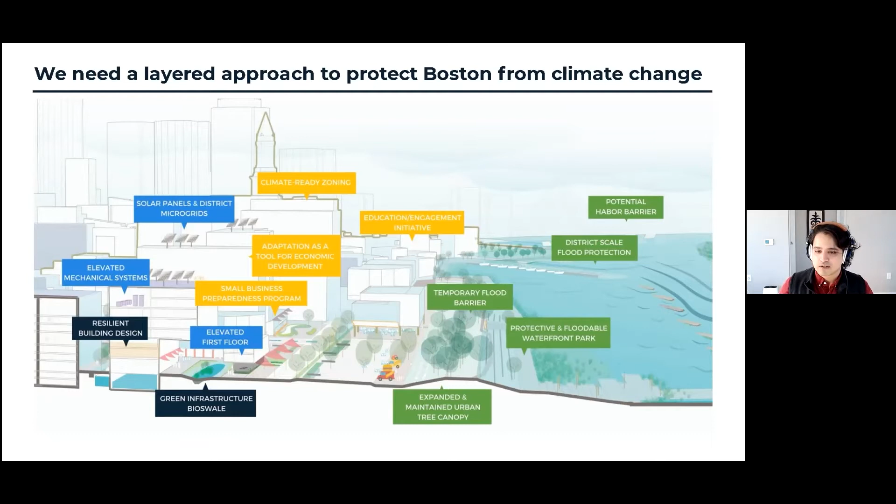I have a habit of starting my presentations with my conclusions, just one, so you don't get bored, and two, so you know where we're heading.

None of this is new to the people on this Zoom, but it's worth emphasizing today that even under current severe conditions, there are several areas of Boston that can serve as entry points for significantly damaging floods. The risk is only increasing each year, but it's very present today in many of our neighborhoods.

Given this urgency, we at the city are committed to exploring all feasible options to reduce climate risk, protect residents, and improve life outcomes for our residents today. But we know it's risky today, and we really need to move urgently. There's a time pressure here.

Second, given the complex ownership and activities along the waterfront in Boston, it's clear that there's a role that private owners must play in being a part of the solution. As Climate Ready Boston shows, successfully implementing resilience investments in areas like the Wharf District and downtown require entirely new levels of public-private coordination, as well as new and more robust coordination among private property owners themselves. We believe it's possible to achieve a world-class resilient waterfront that is safe from severe floods and accessible to the public, but it's complicated and nothing is guaranteed without serious new levels of coordination and collaboration in Boston and across the region.

Third, it's urgent. In areas of Boston that are complicated and require extensive public-private coordination, we do have a real but very narrow window to achieve a unified network of protection in the city. We all know in Boston that public-private coordination can take time, and infrastructure projects, especially big ones, do too. So climate change really isn't waiting, and we expect even in the next decade to have significant increases in risk and exposure to severe flooding.

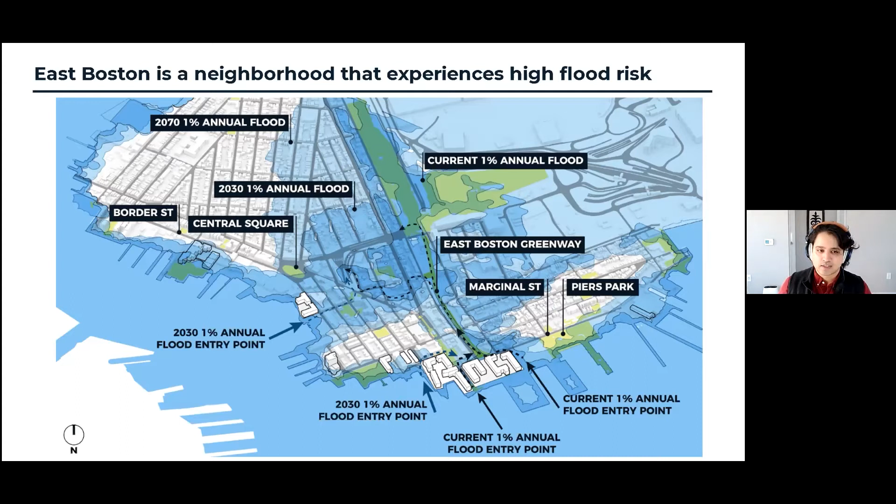Overall, in many other areas of this neighborhood, you see a wide range of fringe flooding, or flooding that comes over the edge but is not necessarily a flood entry point deep into the interior.

In our 2017 study, we identified critical immediate projects, some of which we have completed. First, as many of you know, we purchased and regularly test deploying temporary flood barriers to close one of the Greenway flood entry points. This barrier under Sumner Street actually blocks the current 1% annual chance flood with 1 foot of freeboard. It was great in terms of benefit cost — you're protecting thousands of residents and many businesses for something that's deployable and something we can do today.

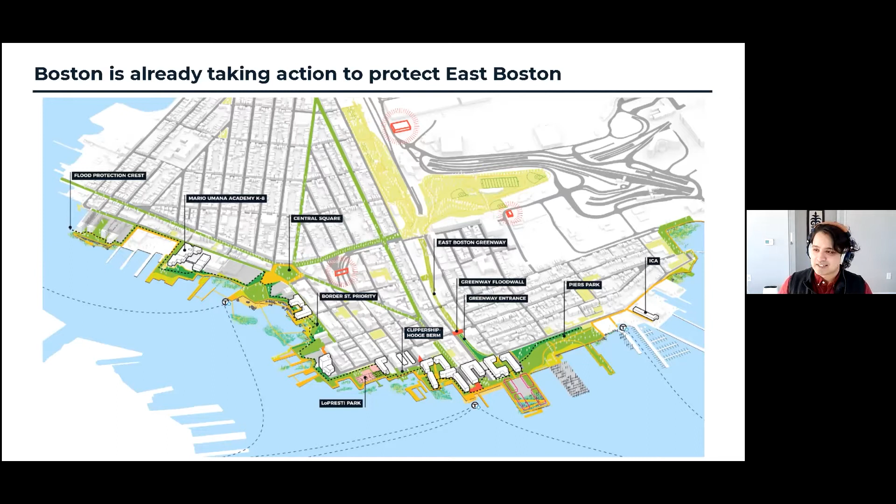Additionally, this fall the BPDA was awarded a $300,000 grant from CZM, the Coastal Zone Management, which will help support flood protection and mitigation measures around Carlton Wharf and Lewis Mall in East Boston, which we identified in this report. And of course, we've seen significant progress at Piers Park and Clipper Ship, figuring out essentially how do we start implementing and knitting together these plans. So East Boston is in progress, and as I mentioned, we're doing a follow-up study and some additional more detailed work.

Moving on to Charlestown, which was done at the same time as East Boston. I can draw your attention here to the area near Ryan Playground, the Schrafts Building, and Sullivan Square. This is the main flood entry point that we've defined so far for Charlestown, and it's a current flood entry point — it's in the 1% annual chance today.

Since this report, we're currently exploring the process of elevating streets in this area, which is a straightforward benefit-cost thing we can do now to protect and block off this flood entry point. We're also exploring how this work connects to other improvements the neighborhood wants to make, or other developments that are currently ongoing or may happen in this area.

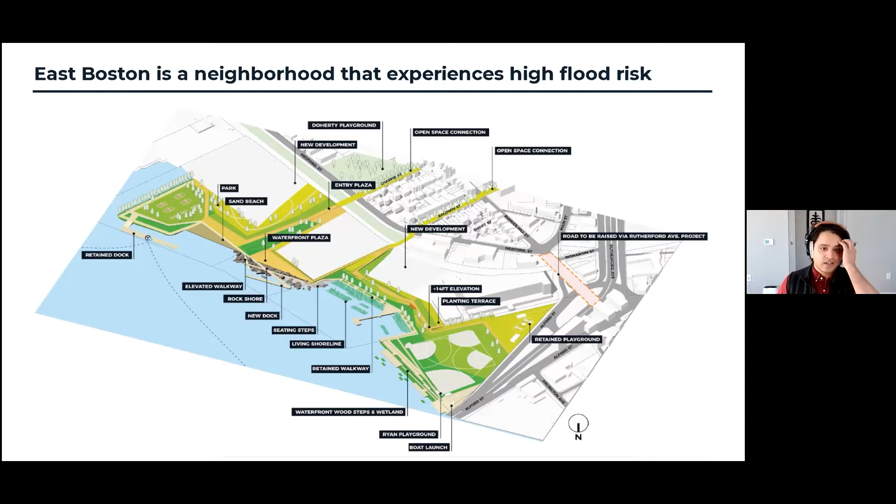This is stuff you've seen before, but it's important to remember that there's things happening in every neighborhood of Boston. Transitioning quickly to our South Boston work from 2018. In South Boston, unlike our prior two studies, we actually didn't have these kind of clear flood entry points that were relatively straightforward to close off.

So in the South Boston report, in addition to focusing on every aspect of this waterfront, we had particular attention on the Fort Point Channel, as it's really a critical site for flood entry into South Boston, and in future years would also lead to flooding in the South End, Roxbury, and other areas. You can see the light blue showing the extent of future flooding that could result from not taking action in Fort Point Channel. So that's another reason why it's critical.

And so for the Fort Point Channel, if you look at the eastern side of that channel, which is at the top of your screen, that is also the site of a 100-acre master plan effort and is a critical flood entry.

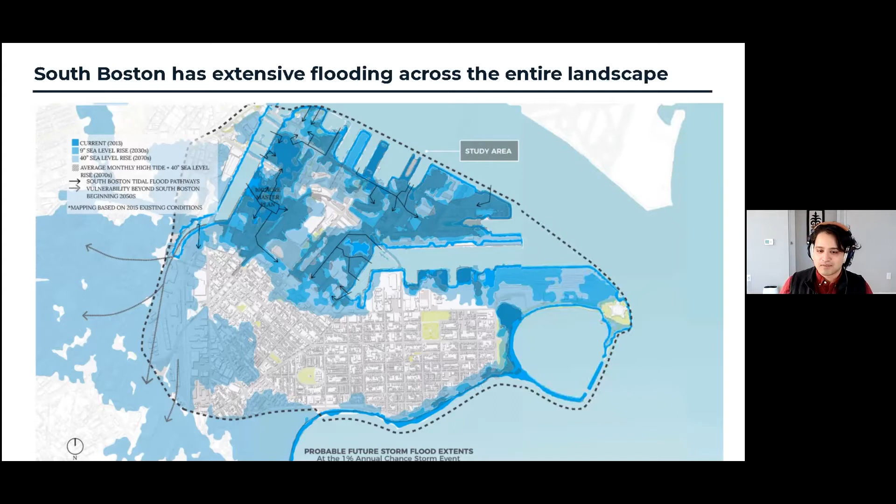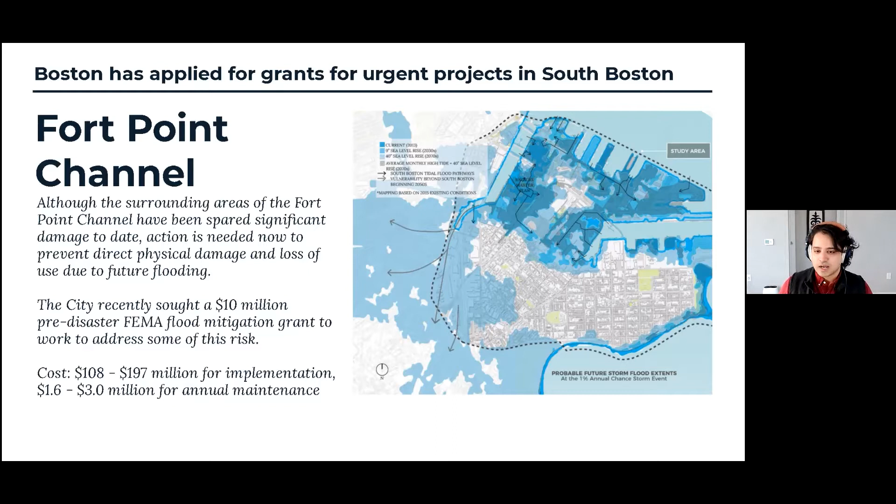Since this report, just to share, some of you might know that the city has recently applied for a $10 million pre-disaster FEMA flood mitigation grant to make progress toward addressing this particular flood entry point. Obviously the full cost and complexity of this is more detailed, but there's work we can do now to help move forward on this Fort Point Channel and make sure we're taking action in every neighborhood. This area has been spared significant damage to date, but it's a current risk, and we really do need to move quickly to protect this area and avoid loss of use due to flooding.

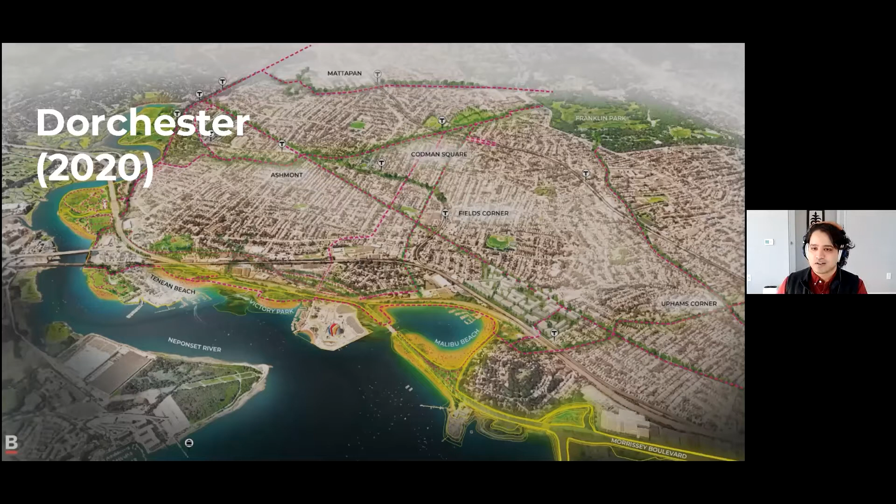Before digging into Dorchester, it's good to mention that last year, the year before publishing this report, we completed a vision plan for Moakley Park that defined a plan which, if implemented, could protect the neighborhood from future flooding and also retain and enhance key active recreational amenities and create equitable access to the waterfront.

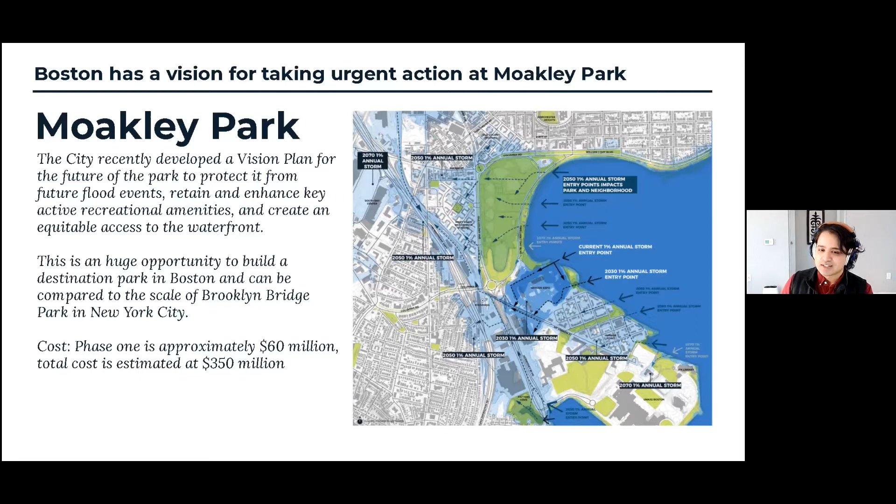This park, which could be compared to the scale of Brooklyn Bridge Park in New York City, gives us the opportunity to demonstrate the added value that climate resilience can bring to residents besides just protecting them from floods, which is very motivating to wonks like us, but maybe less exciting to others.

Just south of Moakley Park, the green blob on the right, you can see the Bayside Flood Pathway, one of seven major flood pathways in Dorchester that we'll need to address in a sequenced, phased manner. Our report recommends integrating flood protection along with the Bayside development project near Carson Beach, tying into the work around Moakley, and then raising the harbor walk around Harbor Point and tying into high ground at UMass.

The goal is a continuous line of protection. I'll go over quickly how we would get there in Dorchester. Similarly, at Morrissey Boulevard North, our report defines a couple options. One of them could be as simple as just raising Morrissey, and another option would be developing a berm along the edge of Morrissey, a berm being a pile of dirt that blocks water.

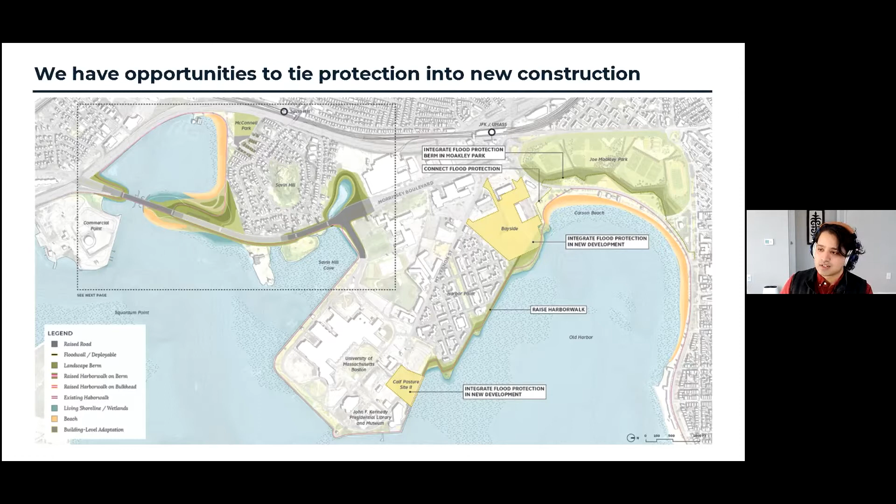Doing that along Morrissey, and then raising areas including McConnell Park, finalizes this section of protection for Dorchester. The main benefit is you're protecting access to the waterfront, protecting existing community assets, and coming up with solutions that are very adaptable and cost effective, which we can put together quickly.

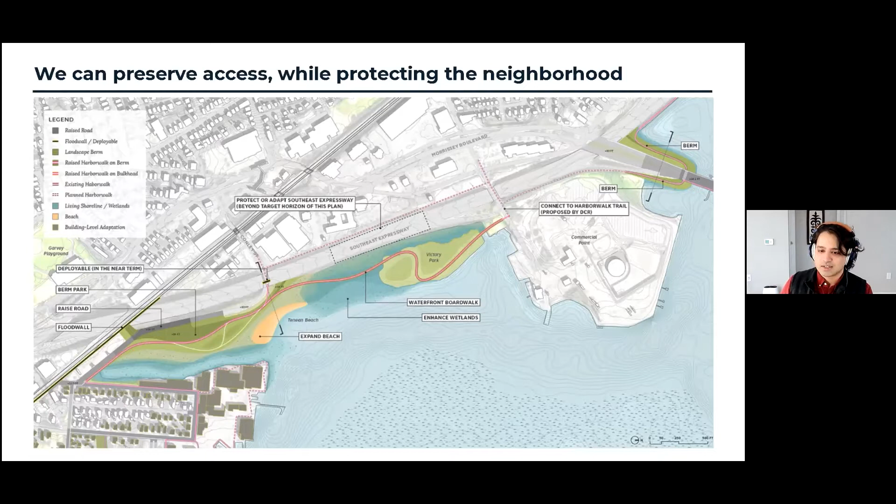I'm going to flip through these pretty quickly given we have 5 minutes. The main thing here is that it's possible to have a clear alignment in this section. Some near-term work we can do is looking at deployable flood barriers at the Conley Street underpass to address current risks, and in the long term, additional berms and road raising.

This is an interesting neighborhood, the Port Norfolk neighborhood of Dorchester. In our report, we propose raising the roads and park elements to protect the existing neighborhood.

And then, to the discussion of a layered approach, we're really thinking about additional building-level adaptations for individual homes that are impacted. So not only protecting with raised elements, but also looking at individual homes and doing a similar thing there in the long term.

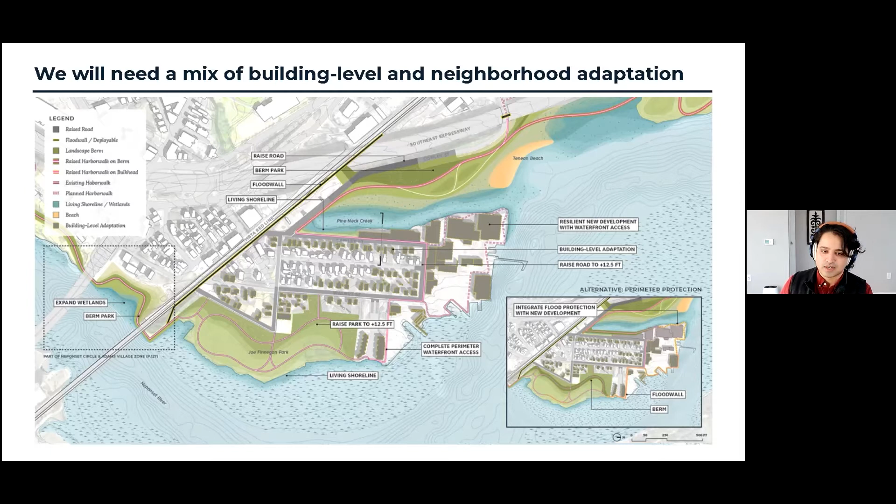Lastly, in our Dorchester report, we determined that maintaining the existing wetlands in this area can actually maintain flood protection while giving us other improvements and retaining existing ecosystem services. So we can use our existing wetlands to protect us and provide benefits there as well, while conserving intact wetlands.

Lastly, I'm going to go into the North End and Downtown report. The long story short here is that there's flooding, and without action, there's going to be a lot more. The dark blue in this map shows current flooding, which if you look at the Long Wharf area, is significant today.

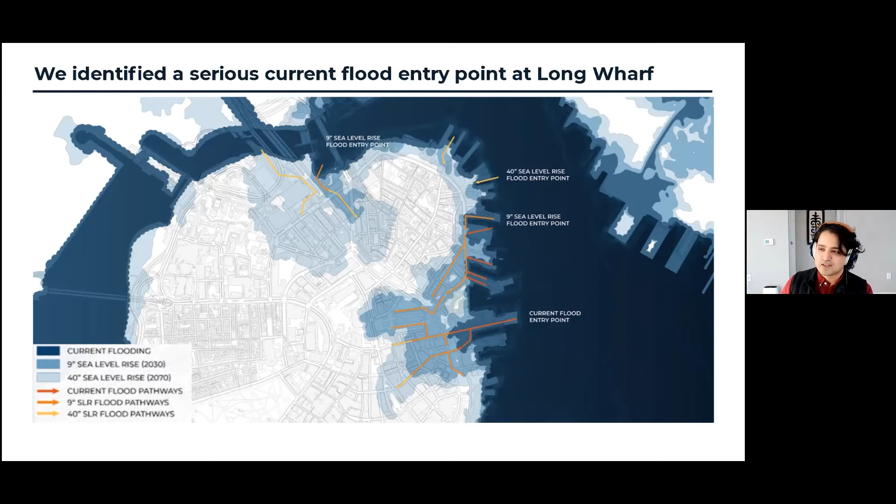The medium blue shows flooding associated with 9 inches of sea level rise expected in the next decade, and the light blue is 40 inches of sea level rise expected in the next 50 years. You can notice significant connections between the flood entry points, so there's no silver bullet here, no single solution. You do need to deal with the whole district.

Our work really looks at a district-wide solution and looks at 4 different options to implement this: spines, which are raised roadways or linear elements; open spaces; raising the harbor walk; and offshore elements like filled lands or ecological systems and breakwaters.

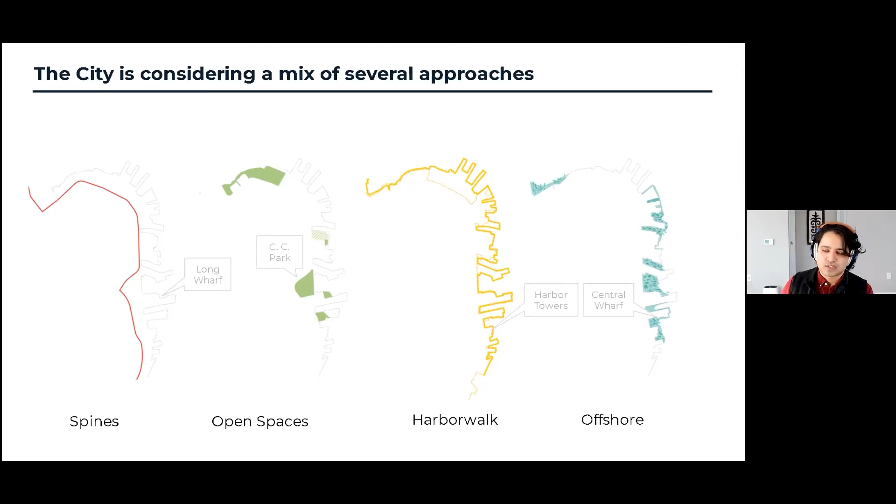Some mix of this is going to be necessary, and it's not going to be easy, but it's going to be doable. The city will help facilitate this negotiation process, working with everyone who owns land along the waterfront to see if we can get to the preferred option, which utilizes all of these strategies to make sure we can maintain access and have everyone protected behind a line of protection.

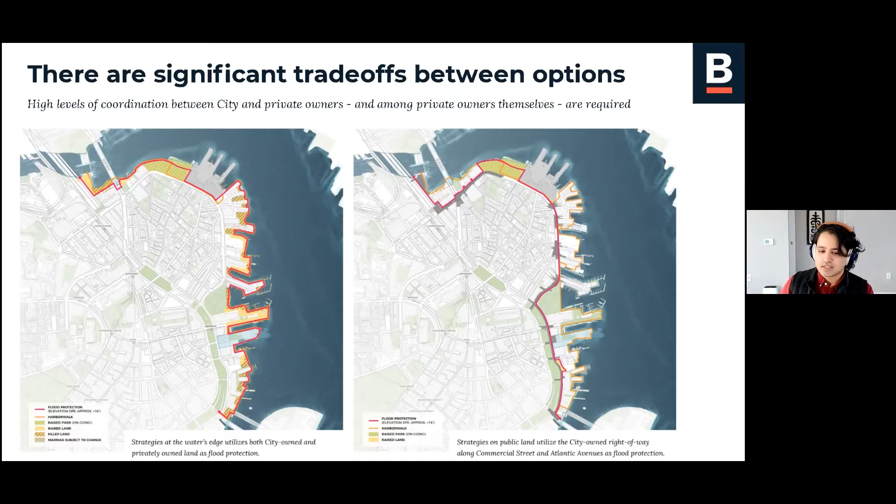The main challenge there is obviously cost, complexity of collaboration, and the length of the actual perimeter of protection required to cover every wharf, plus the complexity of building on existing bulkheads. The option on the right is the fallback, which is not preferred, but would use only city-owned lands, and this would allow us to more quickly establish a continuous line of protection.

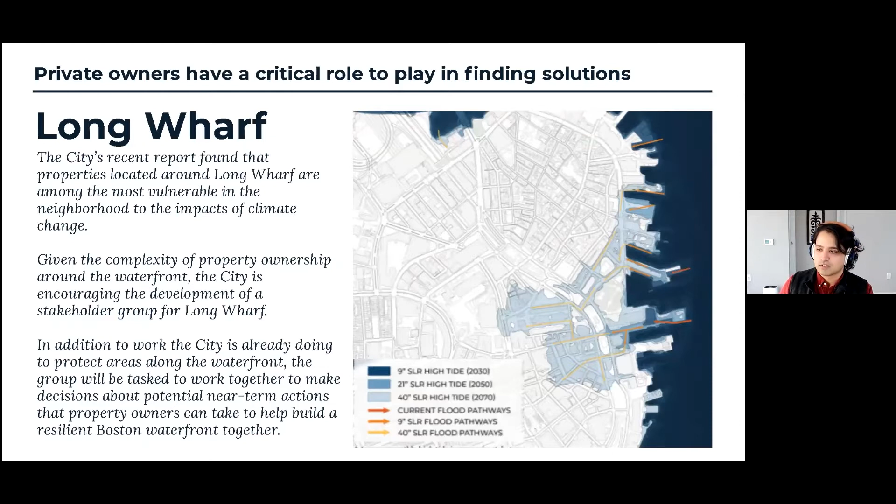If you're interested, you can look at Langone Park and Puopolo for one of the city's first implementations of a park with climate resilient design. And we've launched a stakeholder group for Long Wharf to look at private property owners and what they're doing.

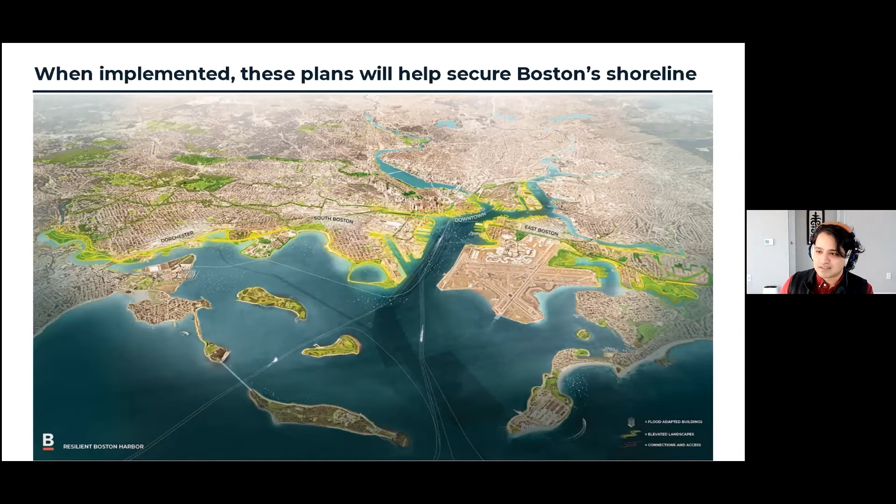While we won't be able to realize this vision tomorrow, the projects presented in these plans are feasible and cost effective, and they do protect residents. These projects will help deliver on Mayor Walsh's vision of a unified line of protection across the entire harbor that not only protects residents from climate change, which is the goal of many on this call, but also equitably improves their access to the waterfront and ensures these investments add value to residents and visitors in their everyday lives, on sunny and stormy days.

Quickly, what's next for Climate Ready Boston? We have a bunch of things coming up. One is a citywide heat resiliency strategy, so we're targeting environmental justice communities with a specific race lens on how Boston and people's experience of Boston has been so far. We're going to be looking at those communities, coming up with strategies, and proposing how to move forward in the near term on heat.

We're working with the BPDA on some East Boston resilient design options, thinking about how we move forward on things we identified in our prior plans from 2017. And I mentioned our phase 2 planning. Finally, something I'm really excited about is how do we bake flood resilience into our zoning. This is a global best practice, and Boston's at the front of this along with a few other cities. How do we really do this in a way that makes sense, is clear to all parties, and actually achieves the goal of a more resilient Boston?

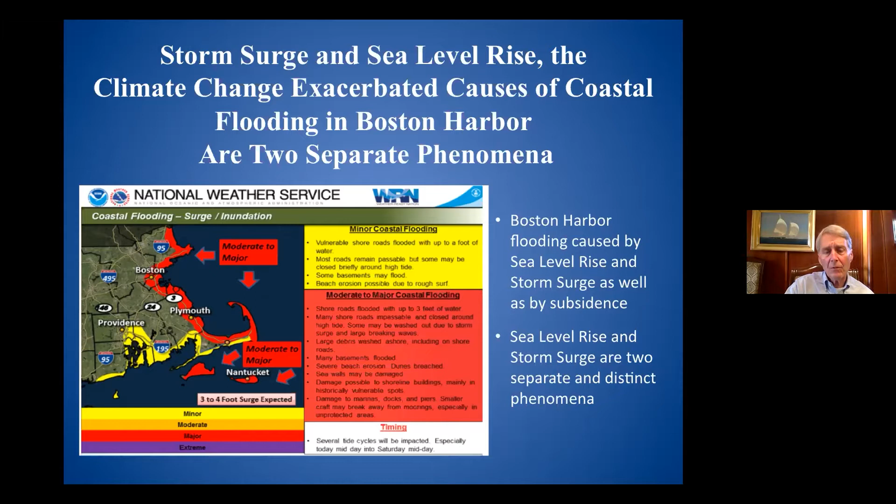In this case as well, we believe these are two separate phenomena that have to be addressed with two separate approaches. Sea level rise is gradual, at least in the short and midterm. In the longer term, there's a great deal of discrepancy in projections as to how fast and how high the sea level will rise. But there is a sense in all quarters that this is gradual, and in the near term, we're dealing with nuisance flooding and minimal damage caused by it.

Storm surge is much different. It is caused by extreme weather events such as tropical cyclones and nor'easters, and these storms are more frequent and getting stronger and more damaging due to climate change.

2020 was a record year, and I'm sure most of you have followed this: there were 30 named Atlantic storms, and 12 of those hit the United States. They hit mostly in the Gulf, so it didn't seem like a record season up here in the Northeast, but it was a tragically record season for those areas, particularly the Gulf Coast. We have to recognize that we've been building along the coast, and 40% of the population of the United States lives along the coast.

If you look at these Atlantic storms, 15 of the most destructive US storms in history have occurred since 2004 — in less than 20 years.

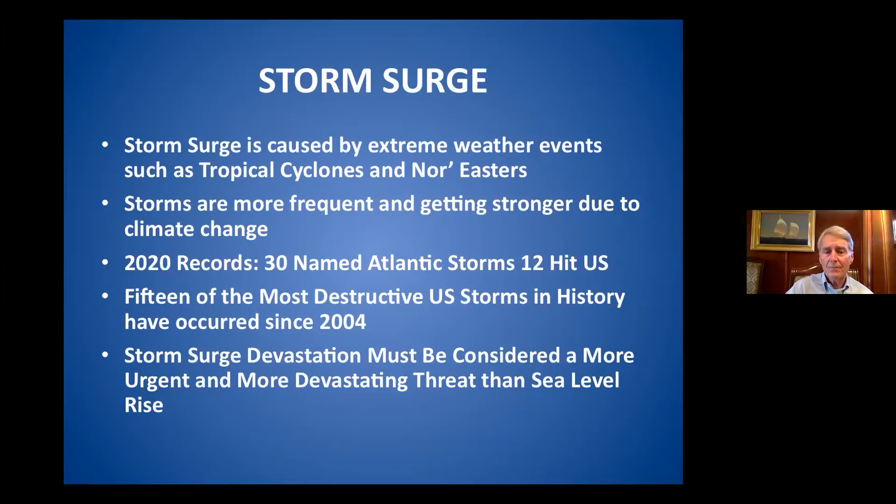So in 2018 — I mean, I'm a Bostonian, and I know that, by the way, there'll be a quiz here. One of our speakers is from Indiana, one is from Boston, one is from Queens, and one is from Texas. We'll have a quiz afterwards for you to determine which is which, but I think it'll be quite obvious, actually.

In 2013, I held the first interstate national conference on sea level rise, storm surge, and aging infrastructure at the Kennedy School. At that time, the general attitude from people from Boston was, well, that's for the rest of the country, Boston is different. As we all know, the rules of gravity or hydrodynamics don't apply to Boston—but they really do.

In 2016 with the king tides, and 2018 with the nor'easters, we received a wake-up call. The entire Boston Harbor region was flooded. Public safety and security in these communities was dramatically witnessed by rescues from Winthrop to Hull, in which people's lives were placed in danger—not only the people in flooded areas, but the first responders who bravely went out in the storm to save them. And our economy was impacted.

Boston is the economic engine for the whole Northeast, for all of New England. This whole metro area was so impacted that we not only lost buildings and structures and had that kind of damage to public infrastructure, but there was a great deal of business disruption that hurt the economy for some time to come, particularly in low income and poor areas. It even impacted the marine ecology of Boston Harbor. For those familiar with Belle Isle Marsh, you'll know how devastated that natural, very special spot was. And it really challenged social justice goals and values.

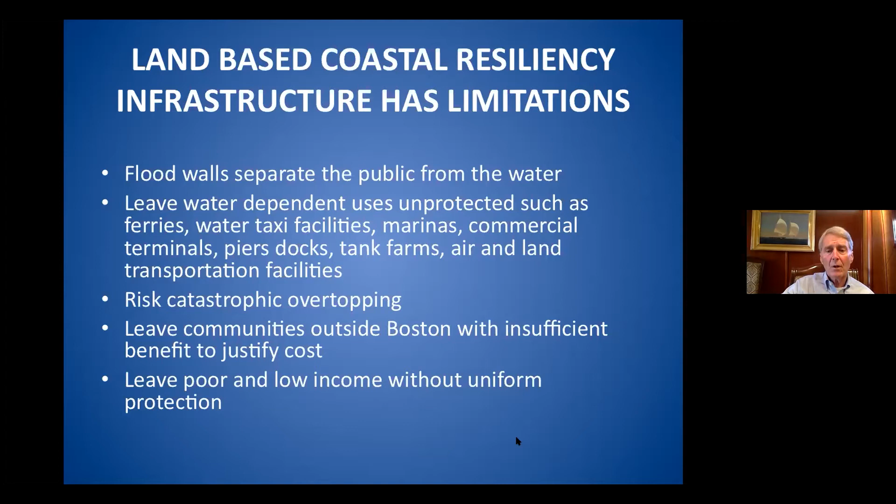You risk catastrophic overtopping. Water going over a regional seagate system goes into the harbor. Water that goes over a land-based system goes into the community. And they leave communities outside Boston with insufficient benefit to justify cost if they're done only in Boston. Again, they leave poor and low-income families particularly vulnerable.

The advantages of a layered defense system are the opposite of that. They don't leave communities outside Boston with insufficient benefit to justify costs. They provide uniform storm surge protection, and comprehensive protection for all public and private coastal infrastructure, ensuring regional public safety and economic protection.

Study of a layered defense option is good public policy. It's good for the economy, it's good for public safety. The option of a Boston Harbor regional coastal resiliency system merits study. It has not been studied. There was a UMass study that came out a couple of years ago, but it says right in the study that, one, it's a preliminary study, and two, it doesn't address layered defense or hybrid systems.

I'm quoting from the study: 'One option not explored is a hybrid solution where a barrier is only used to manage low frequency intense events, with a limited number of closures during a decade, and shore-based alternatives manage all events while providing protection to events managed by a barrier system.' That is what we're proposing.

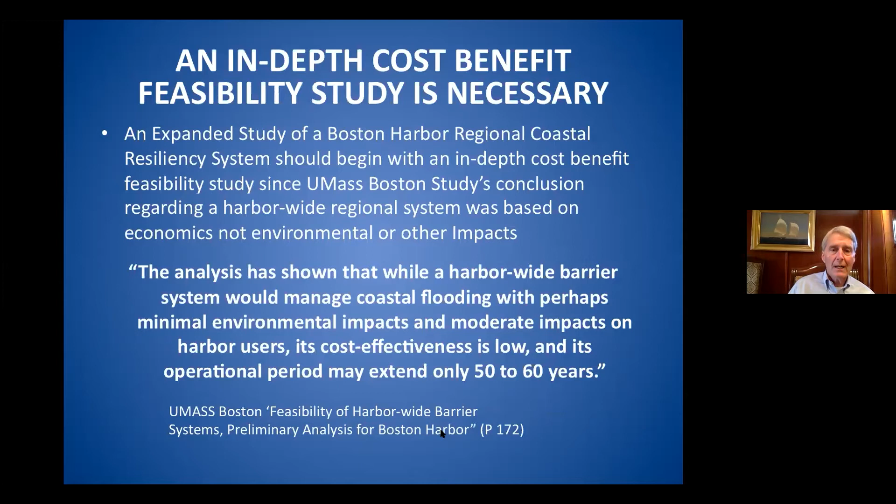So in doing this study, we have to look at a number of cost factors. That means looking at all kinds of different designs, design life options, alternative construction methods, construction timeframe, the possible multiple beneficial uses, and particularly the discount rates applied and finance options.

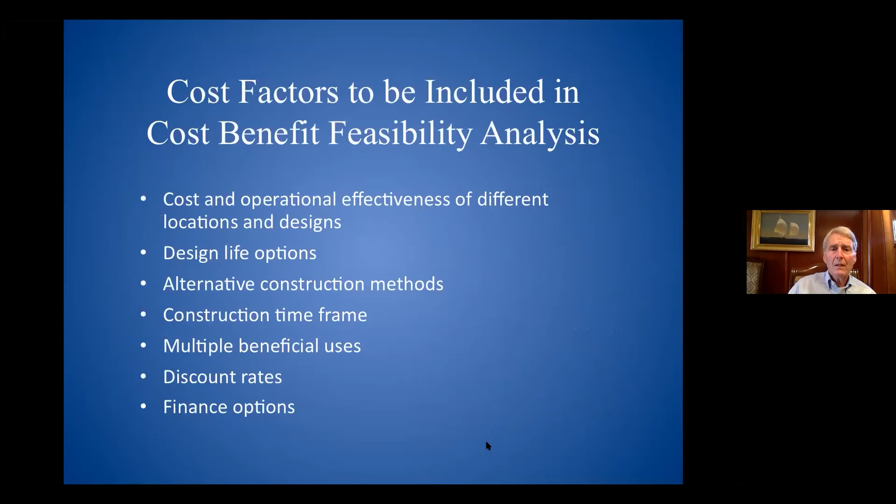The economic benefits of the Boston Harbor Regional Layered Defense System are multiple. They protect public infrastructure—you don't have to raise roads and train tracks and all that. Protection of residential and commercial structures, reduction in flood-related building code costs, preservation of private asset value and public tax base, improved municipal corporate bond ratings, increased coastal development due to reduced flood-related zoning restrictions, reduction in business disruption costs, reduction in insurance costs—which you'll hear more about—with the elimination of mandatory FEMA and other federal insurance requirements, and reduction in the cost of perimeter land-based coastal resiliency infrastructure.

You do not have to protect every single mile of the 175 miles of coastline with a large system that protects against sea level rise and storm surge. You also avoid what is a significant problem with land-based structures of any height: you can reduce stormwater pumping and retention facility costs, because those walls around the perimeter are going to be bathtubs collecting stormwater in heavy rain situations.

There's an idea in Boston that seagate systems are not proven technology. Well, they are proven technology—throughout the US and Europe, as you'll hear.

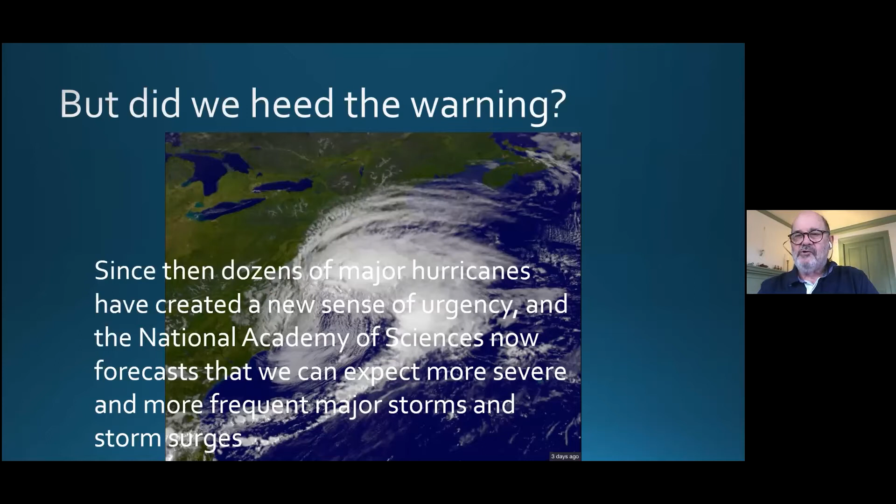We had $75 billion in physical damage, much longer term damage to infrastructure, disruption of business, and so forth, and more than 100 people killed in the metropolitan area around New York by Sandy.

Unfortunately, the immediate response was similar to the immediate response in Boston, which was every man for himself. Like Boston Harbor, we have dozens of communities fronting on New York Harbor and the Lower Bay, and each community kind of went out on its own and started developing its own local protection strategy - essentially perimeter barriers, seawalls, dikes and levees and so forth.

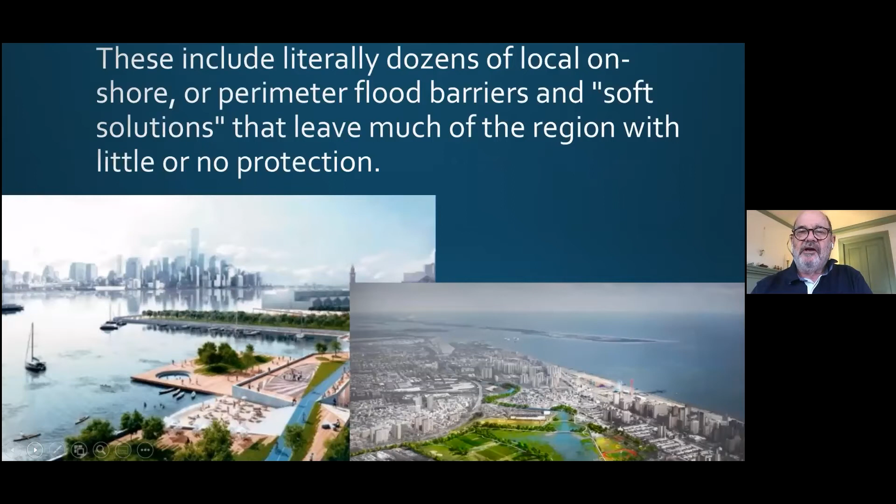The City of New York proposed building literally dozens of onshore barriers or soft solutions, created wetlands and so forth, that left much of the region with little or no protection.

Mayor Bloomberg directed his staff immediately after Sandy to come up with solutions that could be implemented by the city on its own, without having to collaborate with the state of New York or the state of New Jersey. He was also very skeptical of the offshore Seagate concept, and told me right after Sandy, 'Look, Bob, King Canute couldn't keep out the tides, and neither can I.' I reminded him that King Canute didn't fly to Bermuda every weekend to go play golf, and there's some new technology since then. He glowered at me, but that was the direction he gave his staff - stuff the city could do on its own, without having to collaborate with the Army Corps or the states of New York or New Jersey.

Most of these projects, none of them have been built. Nothing's operational after 8 years, and none of them are fully funded at this point.

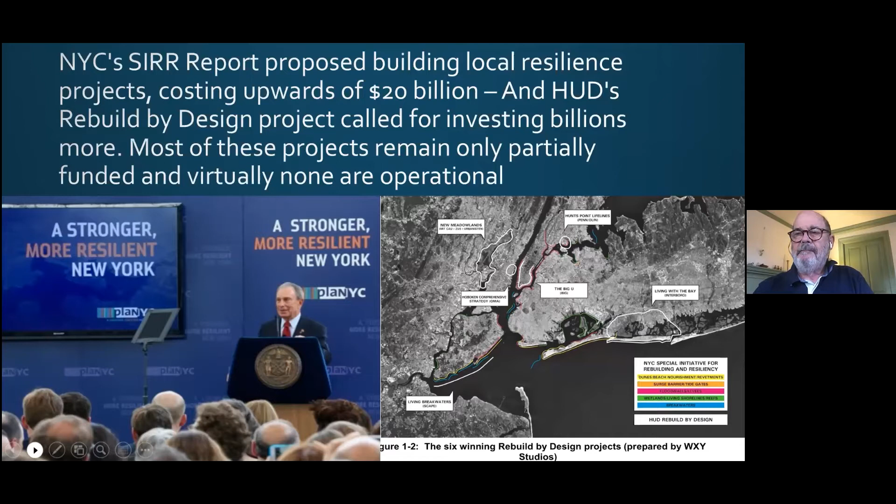Here's a detailed map - if anybody's interested, I can show you the dozens of different recommended actions to protect just the 5 boroughs of New York City. You see that the gray areas to the west and east are the terra incognita, like the pre-Columbian maps of the world - we know there's intelligent life in New Jersey and on Long Island, but we don't know much about it, and we're certainly not going to do much about it.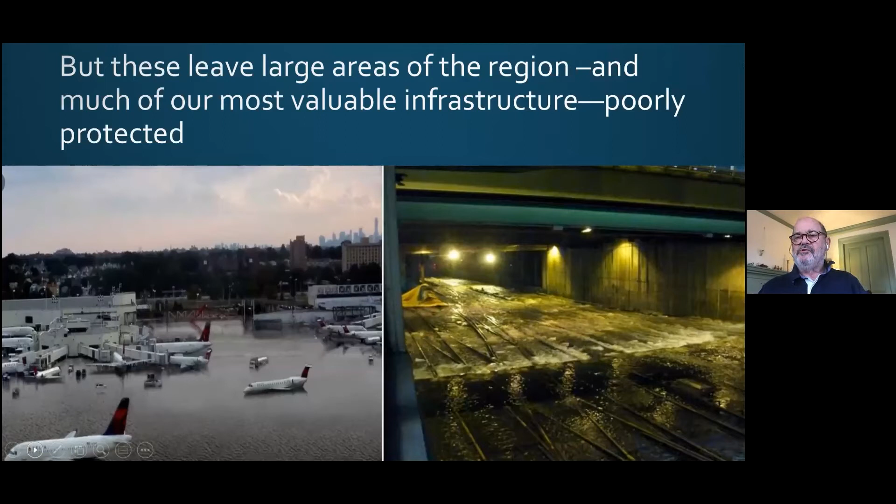We've been looking at the communities affected by this, and an inordinate share of the impacts have been on low-income communities. Robert Moses and others loaded up places like the Rockaways in South Queens that flood frequently with public housing, and nursing homes and that sort of thing are highly concentrated in these areas. So it's an inordinate impact on the most vulnerable populations.

We know now that projects that were supposed to be fast, relatively low cost and effective are turning out to take a lot of time to design and build, cost a lot of money, more than the city of New York or the other municipalities have on their own, and in many cases are of quite questionable effectiveness.

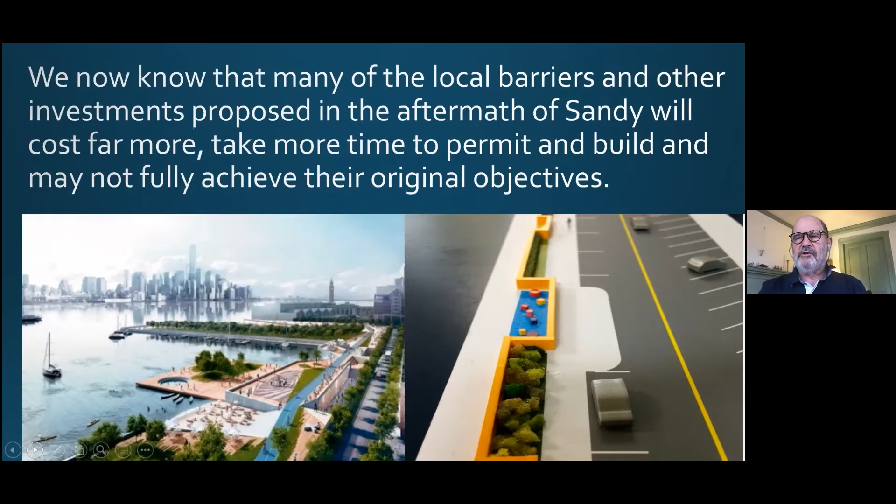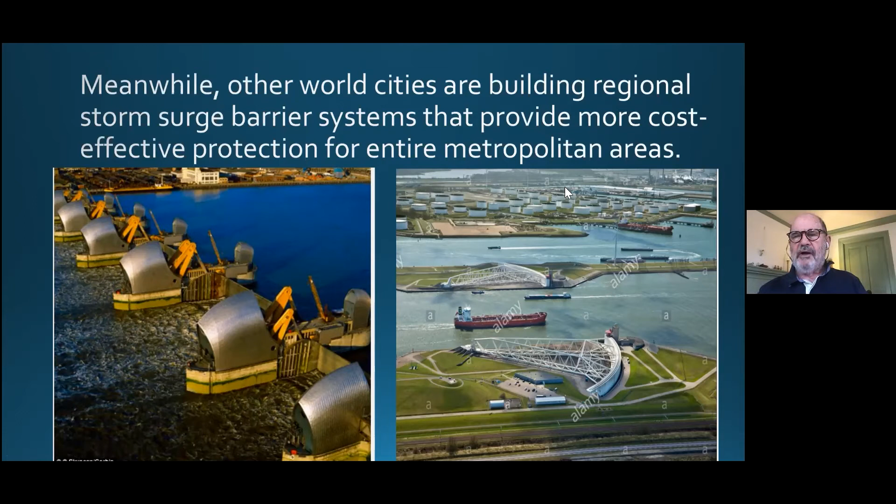Meanwhile, we've been looking at what we'll hear more about from Charles later on, that the rest of the world is moving ahead, and from Bill in Houston and Galveston, the rest of the world is moving ahead with regional sea gate or storm surge barrier systems to provide more cost-effective protection for entire metropolitan areas. I remember very soon after Sandy, we started consulting with Dutch engineers about alternatives for New York. And the first thing that they said was you have to shorten the coastline. You can't protect hundreds of miles of coastline with onshore barriers in a cost-effective way. You need to find a way to create a shorter barrier system that can provide protection against storm surges.

So with the leadership of Malcolm Bowman, a very distinguished professor at the State University of New York at Stony Brook, we've developed a proposal for a network of sea gates. These would be movable gate systems like the Thames Barrier, with large gates for the Ambrose Channel, shipping channel, and so forth. A 5-mile-long barrier stretching from the Rockaways to Sandy Hook at the south end of the Lower Bay, and then a 1-mile-long barrier across the East River in the Bronx and Queens.

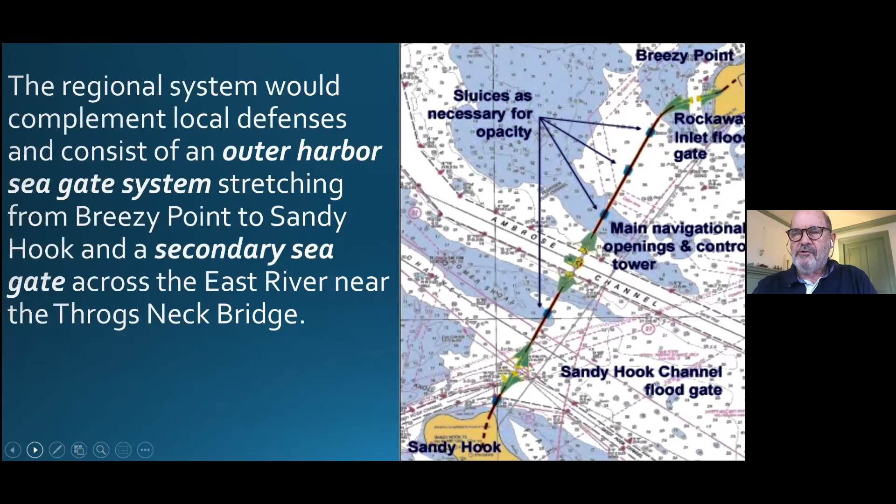The regional system would complement local defenses - lower onshore barriers in flood-prone areas designed to deal with sea level rise and less frequent, less severe storms. For major storms, you'd see the gates closing initially, probably once every few years. In the future, with increased severity of storms, probably more frequent. It'd be like the Stamford barrier, which used to close once every 3 or 4 years and now closes 3 or 4 times a year.

So we've gotten all kinds of pushback from advocates for resiliency, and resiliency for many people, unfortunately, is defined as living with water, which is fine, but for some people, it's - I'll just summarize it as run for your lives. There's nothing we can do to mitigate the impacts of storm surges and sea level rise, which I think is just dead wrong. There seems to be, I describe it as kind of a screw loose in our society, people who just don't believe that we can intervene with Mother Nature or manage changes that are coming in climate. So at any rate, we've got to be more resilient, but we've got to be smarter about how we do it.

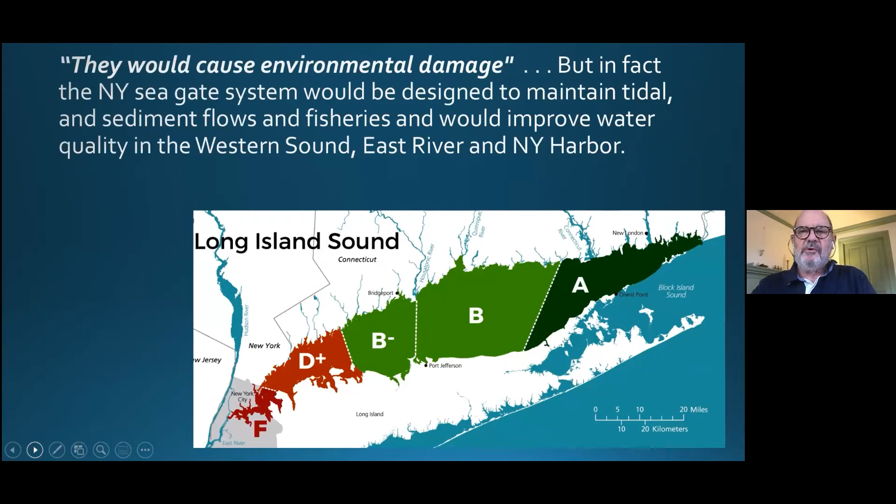Others have argued that they cost too much, but in fact, when you add up the cost of the various onshore barrier systems that have been proposed for the New York metropolitan area, they exceed the cost of an offshore barrier system and the kind of layered defense that Bill and I are both talking about.

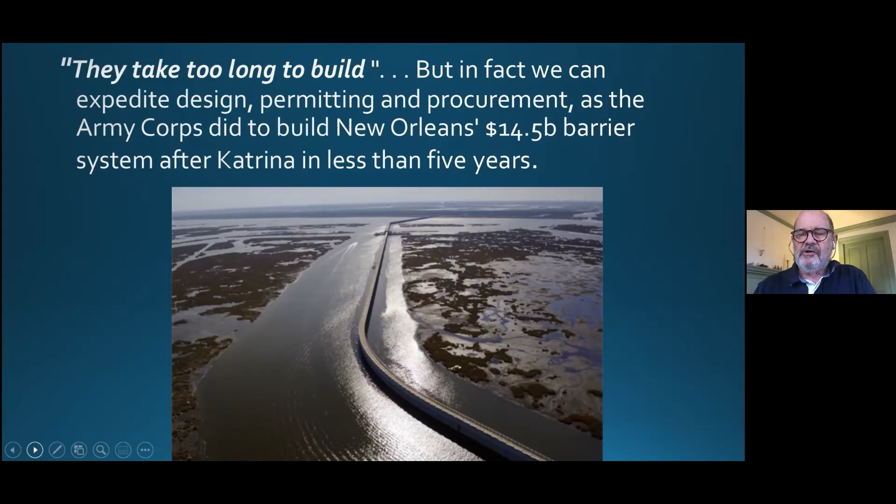Another argument: they take too long to build. When we decide to do these things, we actually can do them relatively quickly. It was less than 5 years to build the New Orleans barrier system. Your tax dollars at work. Again, we had a devastating storm that was the catalyst for some political leadership in that case, and it's the kind of leadership that's going to be needed in Boston and New York to advance similar initiatives.

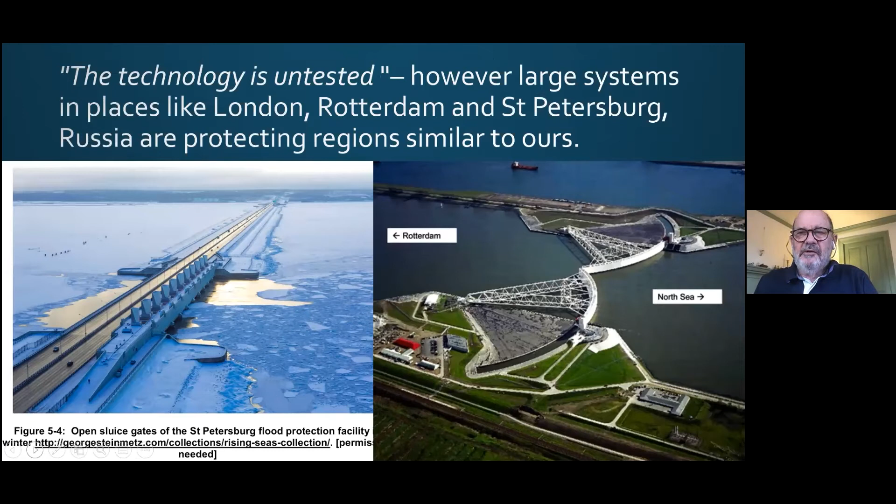This argument that these systems are not safe or not proven technology. In reality, these things have been built all over the world and have an almost flawless history of succeeding in protecting these places.

One of the arguments against the system is the fear that it would raise water levels when the gates are closed. The analysis that's been done by Stony Brook and others indicates that we would have an increase in water levels outside the barrier in Long Island Sound of a few inches, and less than that in the ocean. Very little impact on water levels outside of the barriers.

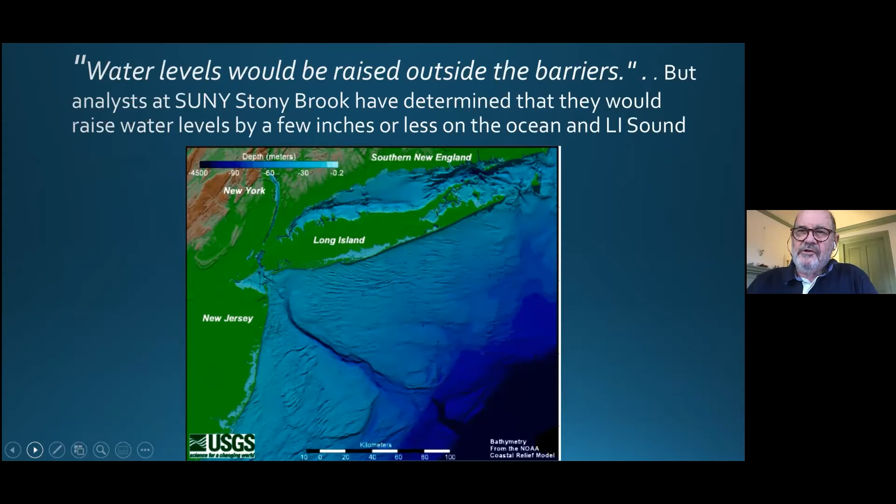One of the arguments being made by environmentalists is that all we need to do is restore the wetlands and natural systems, and that would provide protection against storm surges. But when we've had these conversations with advocates and asked exactly how many of the 14 feet of storm surge that Sandy caused in New York a network of oyster beds and salt marshes would have prevented, the answer from the advocates was, well, none of it. I mean, they're really good at it if you've got miles and miles of these things, as New Orleans and some of the Louisiana cities have — you can soak up a tremendous amount of water. But when you've got only 20 or 30 or 50 or 100 feet, as you do in most of New York or Boston Harbor, very little or almost none of the storm surge could be mitigated.

We've heard that large areas of our region would be left unprotected, but in fact the barrier system, the Seagate system that we are proposing, would protect 90% or more of the population and the critical infrastructure in the core of the New York metropolitan region.

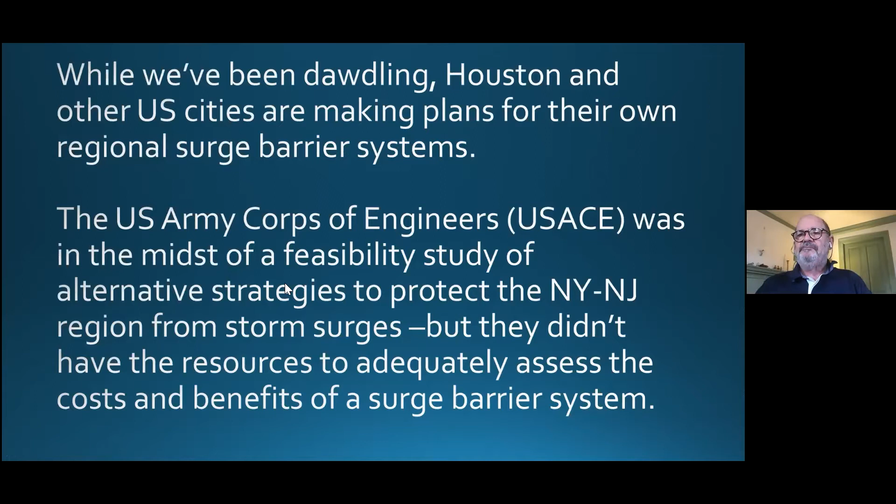The Corps at that point was estimating 60 billion, and we believe that in fact the real cost—and it was 60 billion because they had a 25-year build-out and a very, very expensive approach. It was a 46-foot high barrier where a 30-foot high barrier would do the job. At any rate, Donald Trump put out a tweet that said shut the project down, and the next day OMB shut the project down.

So we are looking at whether we can get enough mops and buckets to anticipate the next storm. I think the lesson learned here is that I hope Boston doesn't need to have one or more additional catastrophic storms to focus on this issue.

I think the kind of layered defense that Bill is talking about, which could incorporate many of the improvements that Sanjay laid out earlier this morning, is where Boston needs to go to protect all of the 15 cities and towns that front on Boston Harbor.

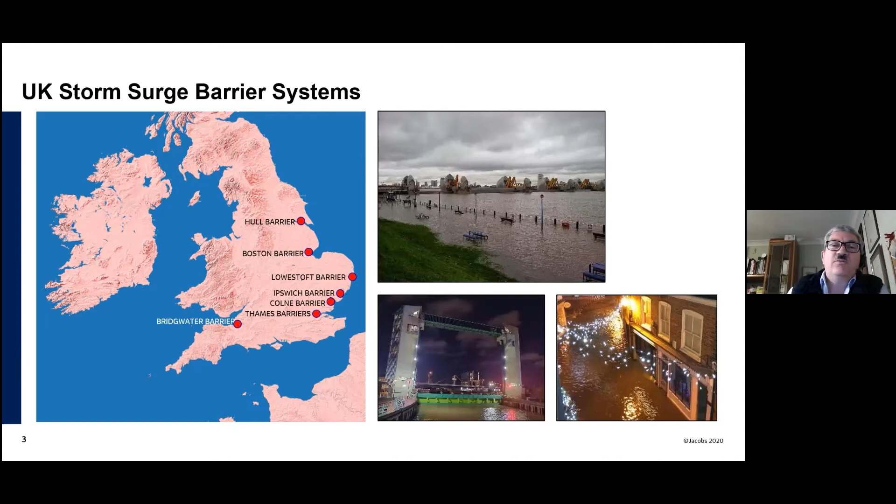So I'm going to talk about the Thames barrier system, and I'll pick up some of the gates and some of the dimensions and the like.

It's important to note with the Thames barrier system, that's the whole Thames estuary, North Sea off to your right, that the Thames barrier is located right up here at Greenwich. There's a whole estuary system, and all the way along, you've got a whole series of other sea gates, or barriers, shutting off the creeks and other smaller rivers and tidal estuary rivers that join into the main Thames estuary.

So don't think that by stopping off at one place you prevent all these sea gates everywhere else. New York is a classic example where if you retreat, suddenly you pick up a whole host of these other gates, and they all have to be operated and maintained.

A key thing to note is that at this present moment, on the back of the Thames Estuary Plan, the Environment Agency and the UK government have invested in a strategy for the Thames Estuary 2100, looking up to 2100, and part of that is looking at a new Thames barrier. I'm just starting studies looking at a location for a new Thames barrier further down, where it says North Fleet and Tilbury, because you've got to start planning now. You need to start thinking now about how you react to sea level rise and everything else going on in the estuary. Where would your future barrier be?

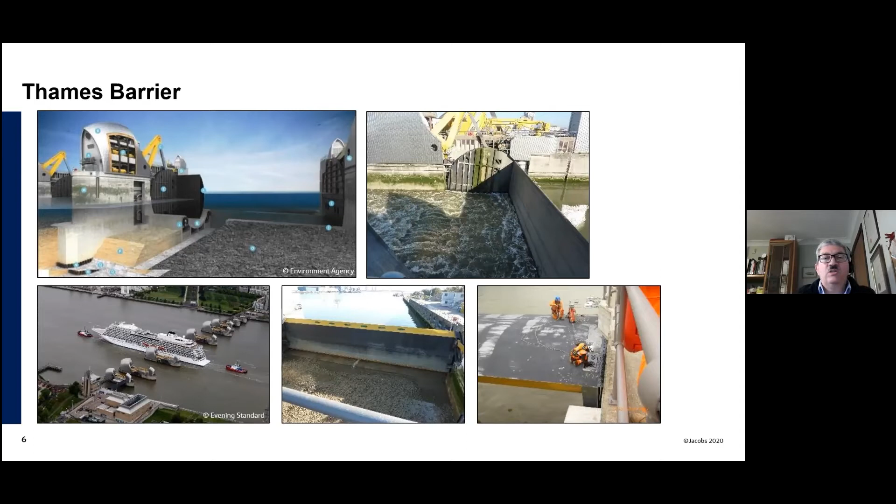But it comes as a system - there are other barriers. You've got the Barking barrier, the Fobbing Horse, Dartford Creek, and the existing Tilbury barrier, which has reached the end of its design life - it only had a 50-year design life. So currently we're designing a reverse mitre gate, which uses the lock gate for the inlet to the port, together with a system which allows it to dual function as a tidal surge sea gate. This work doesn't stop - replacement, maintenance and refurbishment needs to continue throughout, especially over a 100-year design life, and those costs need to be considered.

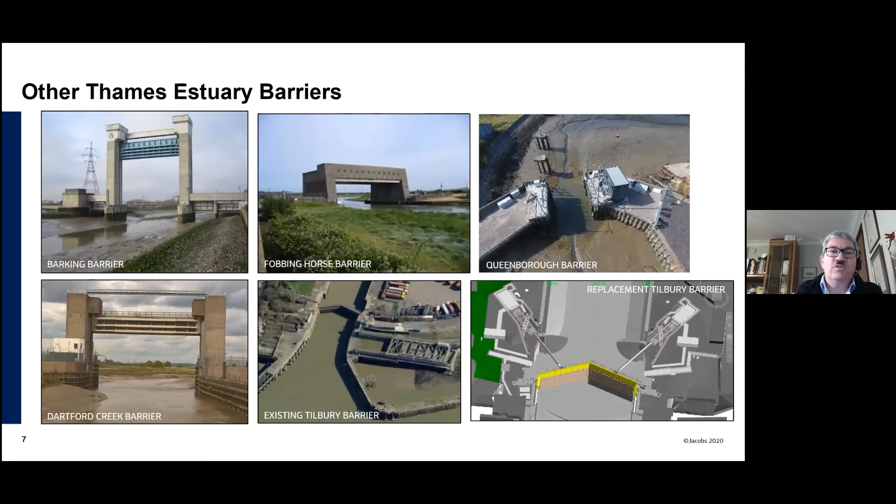There are a number of other UK barrier systems, all ranging about 98 to 100 feet. There's Hull and Ipswich, Hull constructed in the 1980s, Ipswich completed 2 years ago. And your Boston barrier, ready to rock and roll and protect not all of Boston, but a substantial part of it. There's still another 2 years to go for the rest of the system around the corner.

Then you've got Bridgewater barrier, which is just starting its detail design, as is Lowestoft barrier. All these gates may be small, but they've taken a long time to get there, with a lot of political will and putting the benefits across. Lowestoft barrier, the whole predication of that and why it's needed is all about economic growth and the surety for business within that area. There's not a huge amount of residential property, but a lot of commercial and business and economic growth related to this, giving confidence to stay and also to come.

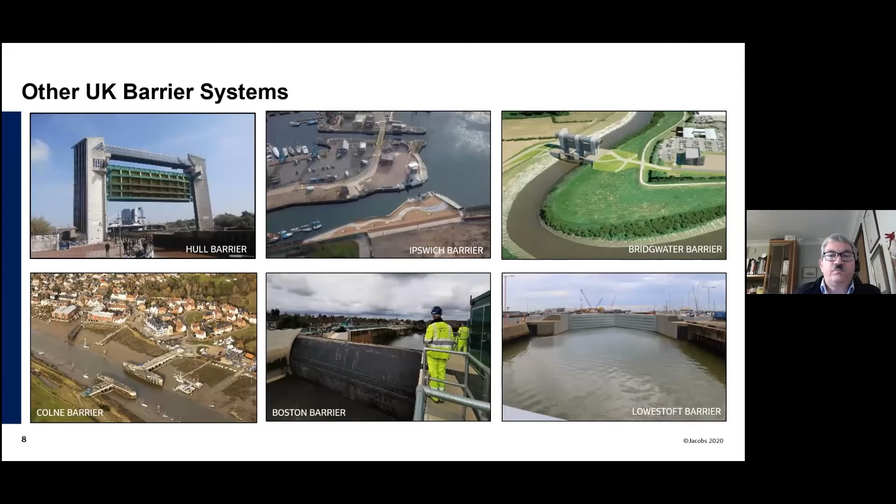It's a series of gates - essentially 65 piers with 62 gates, all about 137 to 140 feet wide. It's been operational since 1986, and the cost at that time was about 2.5 billion euros estimated.

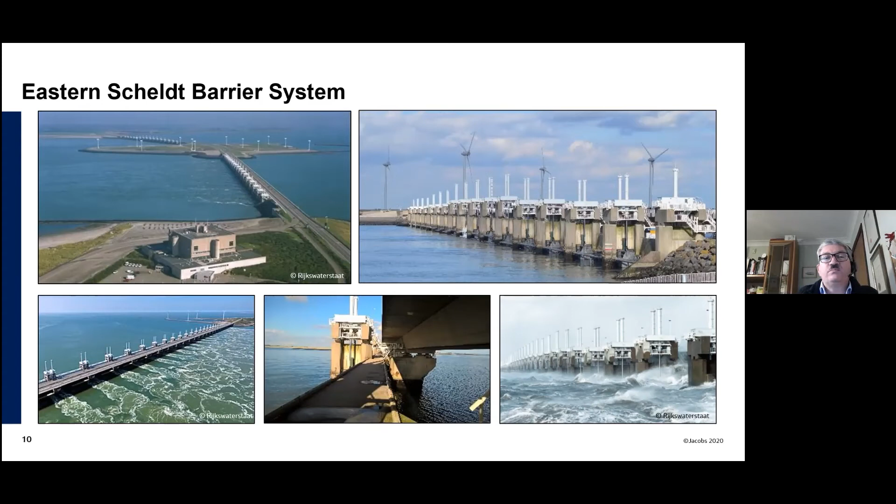But again, the East Scheldt barrier has been built and operates maybe 2 to 3 times a year in anger. The Haringvliet sluices, further up, are in a way similar in that it's a sluices-type structure like the Eastern Scheldt barrier. It's not an opening for navigation, but its length is notable - it has 2 rows of 17 sets of gates, each gate about 200 feet wide, and its closure for high tides is on a similar vein as the Eastern Scheldt barrier.

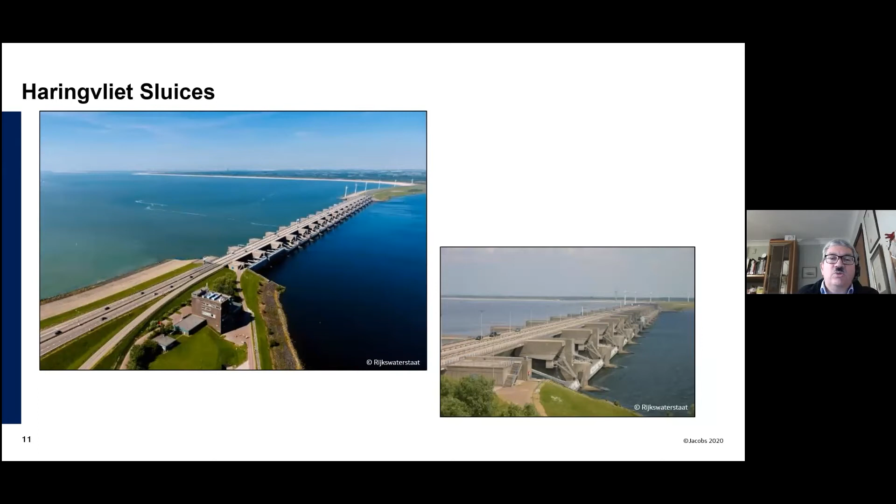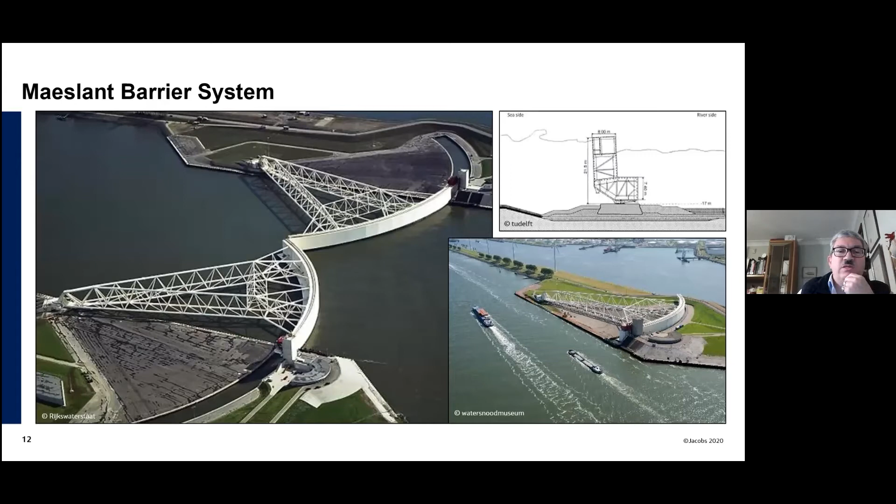Okay, so the Maeslant barrier system - you've seen it all. About $545 million, and it spans a 360 meter wide channel. It opens up and traffic, the navigation traffic, comes through, so little navigation impact. So far it's closed only once in anger, but with sea level rise, it's expected to close more. The Hartel barrier sits with it, and comes as a system protecting the Europoort and Rotterdam area. It also comes with the Holland and IJssel barrier as well. So there are 3 sets of barriers in and around Rotterdam, essentially protecting that port area and Rotterdam itself.

The Ramspol barrier is further inland, so it's slightly different. This is an inflatable barrier. It cost about 100 million euros. And it's operating on a regular basis now throughout the season - about once on average a year that it closes in anger.

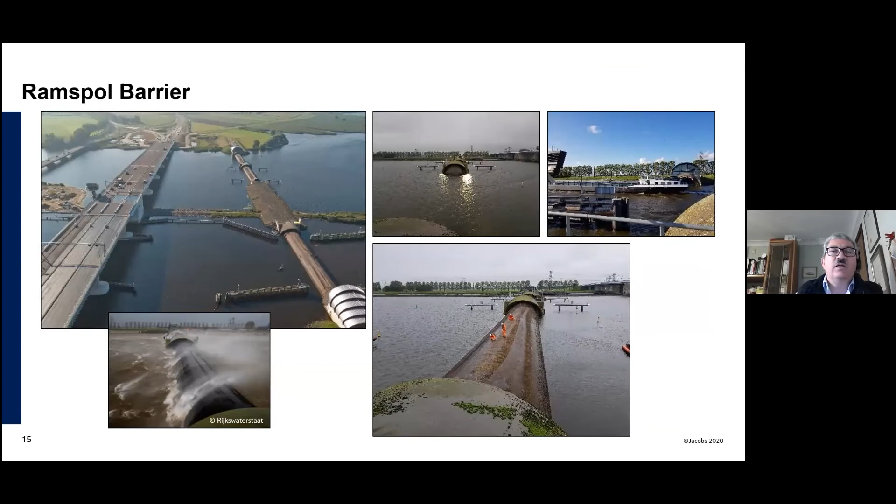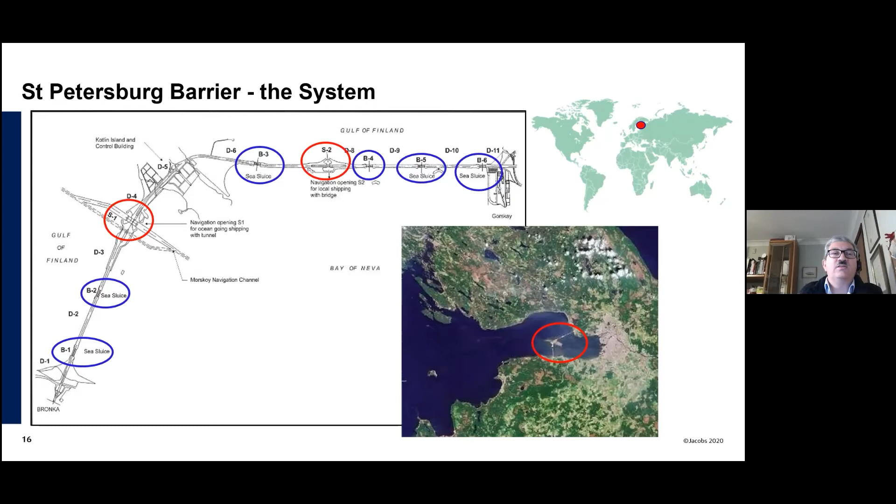The St. Petersburg system has a lot of similarities to the thinking for the outer harbor barrier for New York, and that's where some of that concept came from when it was discussed early on. So a series of sluices and gates and navigation gates at a cost of about 2.2 billion pounds - so around 3 billion dollars - and it was designed for a 1,000 year flood. Water quality was an issue, but the water quality was so bad that they did a whole big cleanup in terms of all the discharges and treatment processes, which actually significantly improved the water quality behind it. How that would work nowadays, I'm not so sure.

These are the series of gates you've got. You've got a vertical lift gate as your secondary gate, about 360 feet wide, for local normal navigation, and the bridge can rise, but it has a road on top right through the way round. This is the primary gate, very much like the Maeslant, about 656 feet wide. It was in operation by 2011, and its first flood was in 2011. So it worked straight away - billions spent, but worked straight away and did its job.

The interesting thing though was it took such a long time to get there, with a lot of issues with funding and everything else. It wasn't ready last year in November, when there was the second highest flood event in Venice, causing millions and millions in flood damage to Venice. It wasn't ready in time.

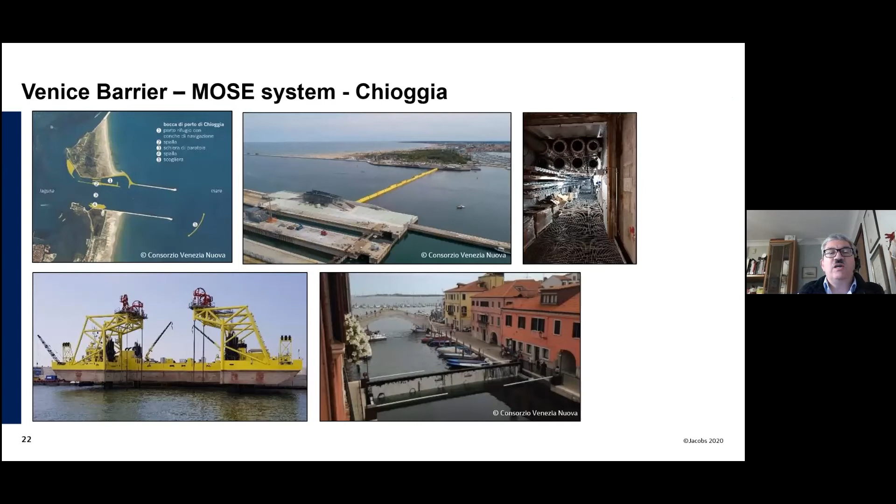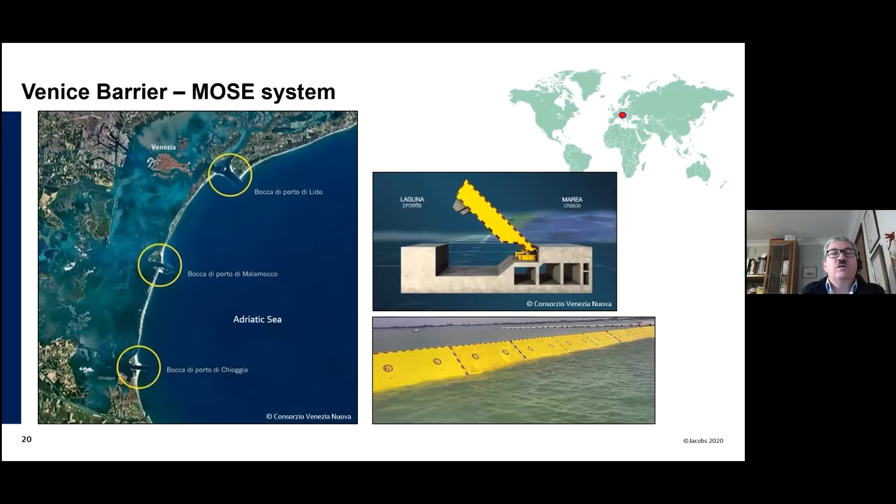And these are just photos of this being deployed across the various openings. But again, you've got to have maintenance for these things. You have tunnels with services underneath, and you've got to think of the locality. This is Chioggia, which has its own little gates - a system. And as part of the Venice system, there's also strengthening in between these entrances of the shoreline, of the coastal defenses across there.

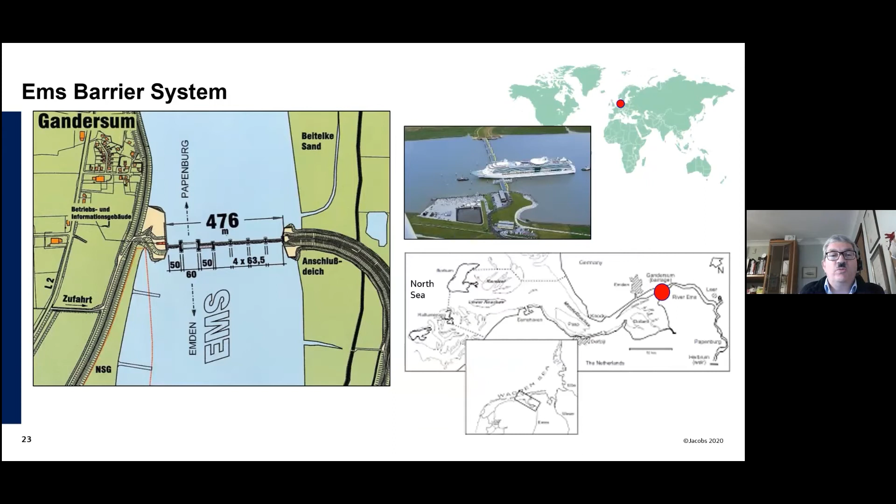There's one in Germany as well, on the border with Holland on the Ems River, tidal. It's dual function - it actually retains water to ease navigation on its upstream side, so it almost works like a barrage. That cost about 220 million euros and has been operational since 2002 with no problems. These are some photos of it in its location.

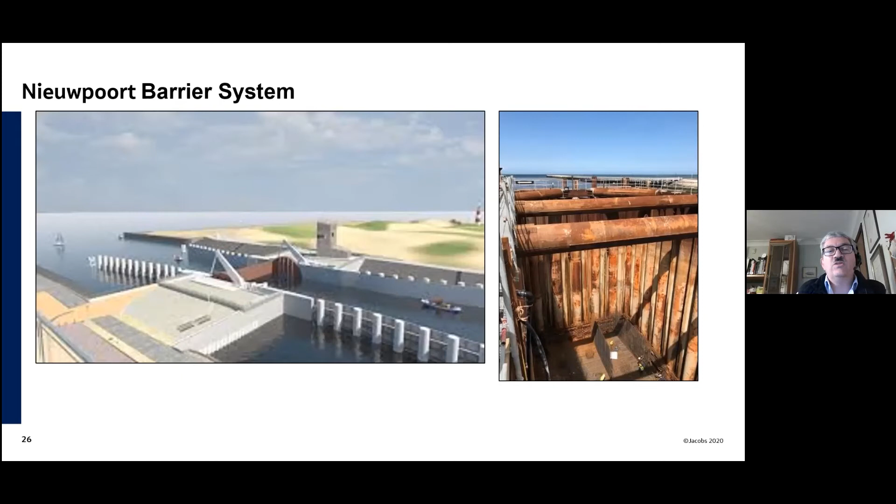So those are my slides, a very rapid go through. There's a lot of barriers to cover, but I think the message is the technology is certainly there, but it has to work as a system. Gates don't work on their own, and there's long-term thought needed about investing in their maintenance and ensuring their reliability over time. Sometimes you need to think about where does the replacement barrier go and what does that look like? So thank you very much.

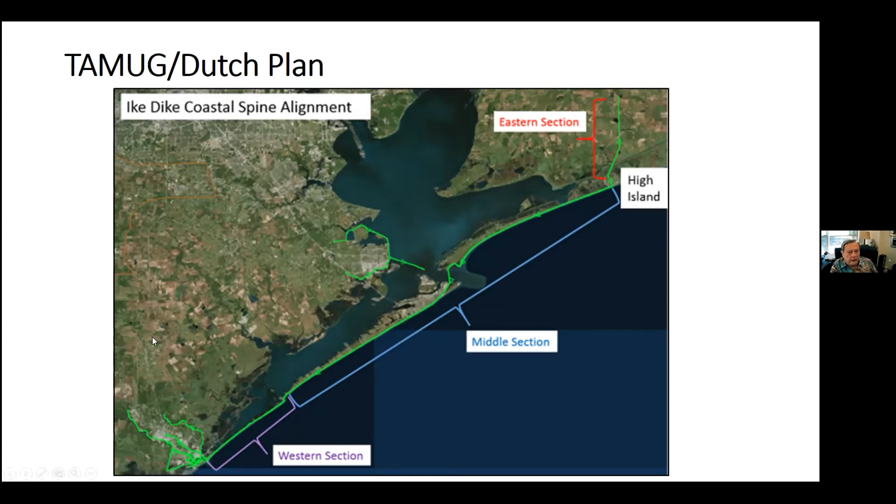So what this does is give us regional protection for the whole Houston-Galveston area. This was first proposed by us in 2008 after a bottle of Chateau Margaux, which I was trying to drink to keep it from going bad after Ike.

Others, notably Rice University, argued for in-bay solutions, and they looked very hard for them. Essentially what we found together, and now they say you need the Ike Dike plus in-bay solutions, is that if you try to protect every little area with donut dikes or polders, as the Dutch call them, you end up with solutions that are fighting each other. Every time you make your polder higher, the other person has to make their polder higher. So you're in this funny situation. The Dutch backed off and said, we're going to shorten the coast and we're going to strengthen the coast. And of course, that's been extremely successful for them since their devastating storm in '53, which also started the English on their very successful coastal barriers.

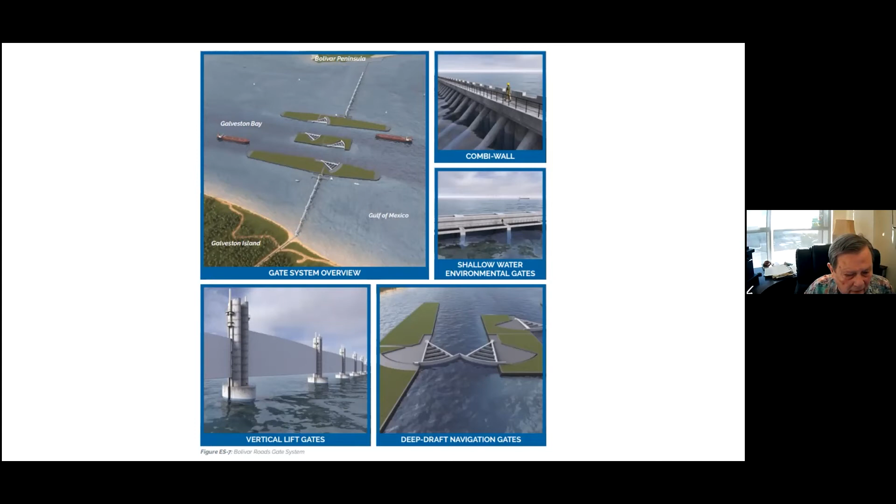And this is one of the areas of the Corps report that I support strongly. An area of the Corps report I don't like is the solution they came up with for the land barriers on West Galveston Island outside of the city, and on Bolivar Peninsula, which is mainly natural area, but has a lot of beach houses behind it.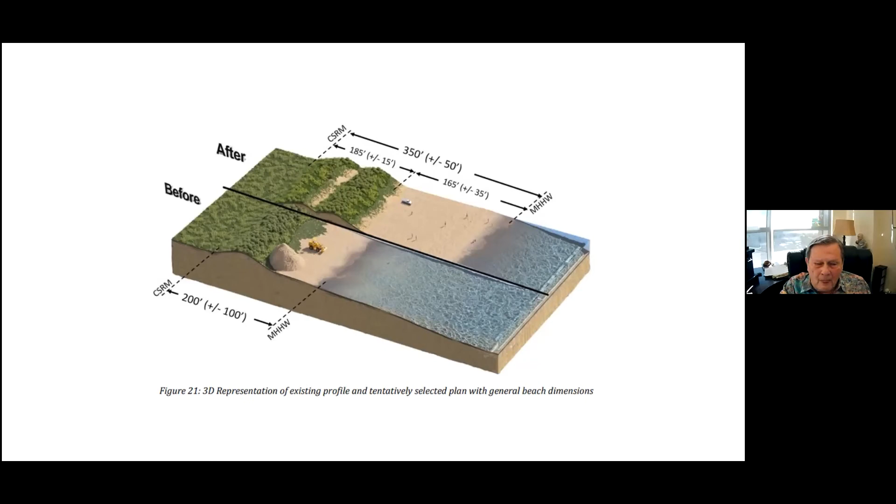So for consistency, going back to that basic premise: the stronger you make the Gulf defenses or coastal defense, the easier it is to do in-bay work. We want to make these stronger. Our solution is core-enhanced dunes. The old classics are armor stone revetments.

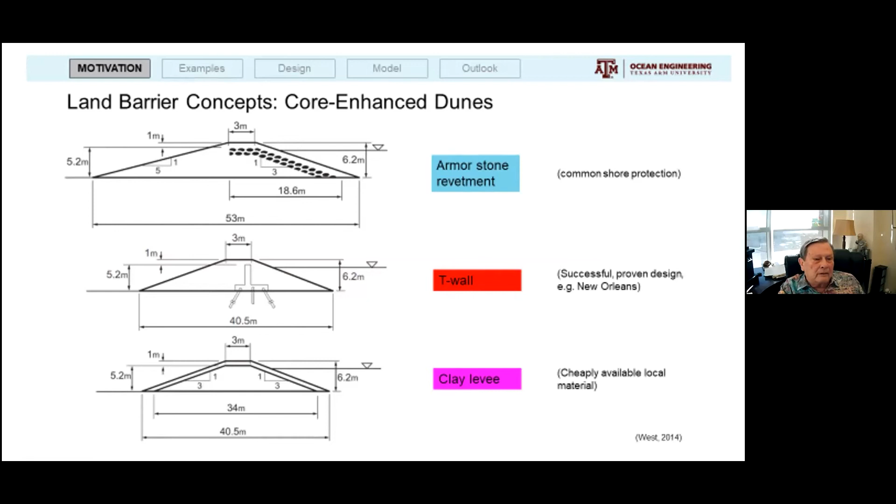We're looking at also working with the Corps on some T-walls like the New Orleans walls - we would cover them with sand. Probably our favorite right now is a clay levee; clay is very cheap and common in Texas. We have some designs that would cost less than natural dunes, with about a meter of sand over it, looking just like a dune and having the same basic slopes. If you walk on it, you can't tell the difference. The Corps hasn't wanted to look at these, but we're pushing them pretty hard. There are existing hybrids all over.

Some of them were by accident. This was a rock wall that just got sand covered. They're actually building them in Hawaii and Virginia now.

And the dike and dune constructions in the Netherlands are famous. In Noordwijk, essentially, they had an issue with being right up on the water. So they did a very heavy rock protected sand core and then built over it so it looks natural. And I've been there and looked at that.

Probably the most innovative and maybe interesting one is the Katwijk in the Netherlands, where they had a parking problem. So they solved their parking problem by building a dune, putting the parking lot under it. See the happy little car under the dune, and then you walk up and you walk to the stores and beachfront and restaurants, or walk out to the beach, which also has, of course, restaurants, being Dutch. It's a very innovative solution.

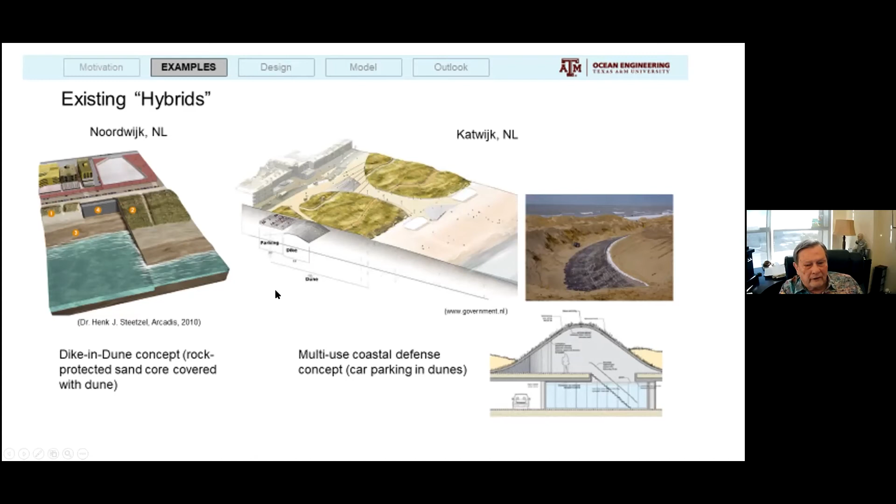I found I can't show this to our Galveston City Council because they think they have to be this big to work. They don't. These are huge structures that you don't need. A few feet will work, of course. But it just shows how you can be innovative and combine different combinations in this.

Back to the multiple lines of defense on the coast. We're now looking at the Galveston Ring Barrier much more like you guys are looking at Boston, where our arguments with the city leaders, and I think they're being very well received, is that we have to take the core ring of a tall wall isn't really going to work very well, and it'll be almost worthless for nuisance flooding. You're not going to close up a big wall every time you have a nuisance flood, every time you have a sea level rise. And as Bill pointed out, we're going to see those more and more and more.

It's just the way that it's going to be. You're going to have more and more times that you're going to be shut down. So we're coming up more like landscape architecture, urban planning approach, where we try to build city functional features that are higher, much like Sanjay was talking about some of the thinking that they're doing in Boston. And so we're probably going to argue that we don't want that ring barrier. We want a different system.

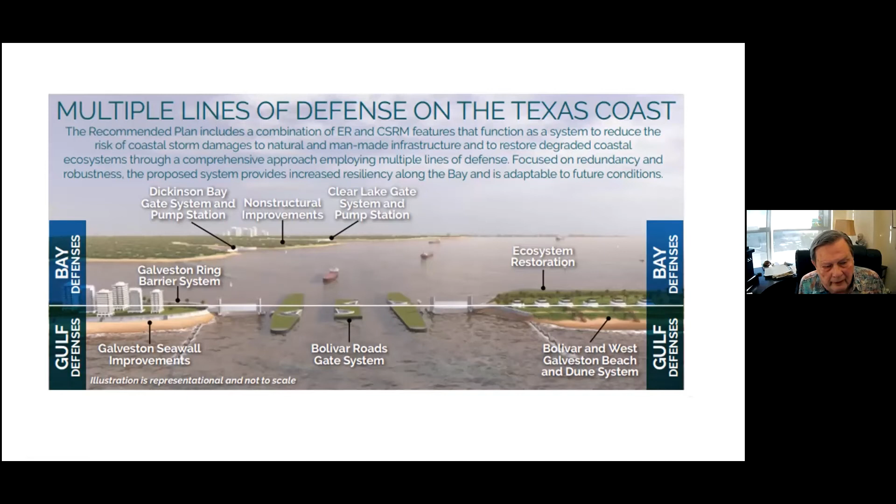It's got to go to the chief for a report in about March, May 2021. And so that's when they would ask for congressional authorization. Notice authorization, not appropriations - that's another fight totally. The Corps already has $100 billion more authorization than it has appropriation. So get in line and start, and then you get into the importance.

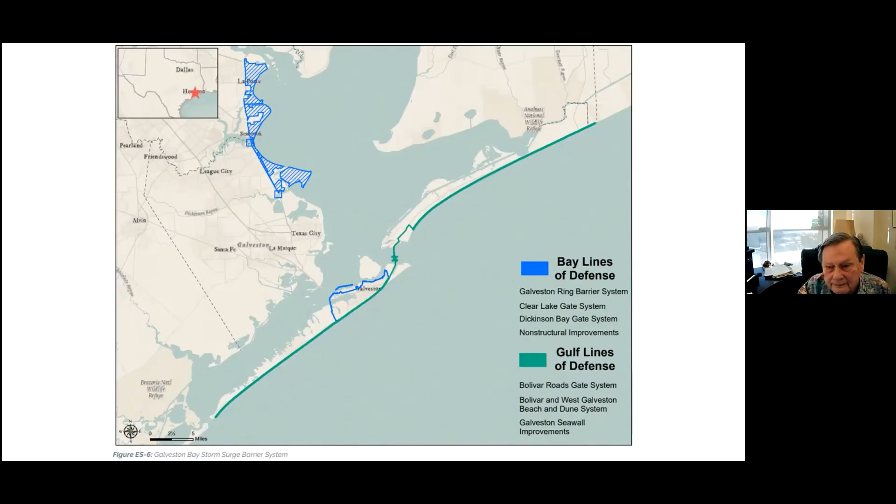Thank you very much, Bill.

As Bill has just gone through in very compelling fashion, this concept of shortening the coast makes sense in the United States as well as in Europe, as Bob pointed out as well, and as I've attempted to articulate. And the technology we're dealing with, as Bill has indicated, is evolving quickly from core-enhanced dunes to gates that go in and out, smaller gates, to lift gates that allow for reductions in flow of less than 10%, avoiding any kind of environmental impact.

Bill has been on the forefront of this, and as you can see, it's a collaborative process between local government, regional government, state government, universities in the US, and firms like Jacobs that have European experience as well. So you're going to take the local firms like Tighe & Bond that have done municipal work, and take Jacobs that have done international work as well as local work. You integrate the engineering, you integrate the science, you integrate the planning, and we have a system.

The next speaker is a very important speaker. Most of you have heard of the UMass preliminary study on what they call a harbor-wide barrier, what we call a seagate system. And in that, it was very interesting that in this study, in assessing the effectiveness and viability of a regional system, UMass concluded two things that I think have gone underreported.

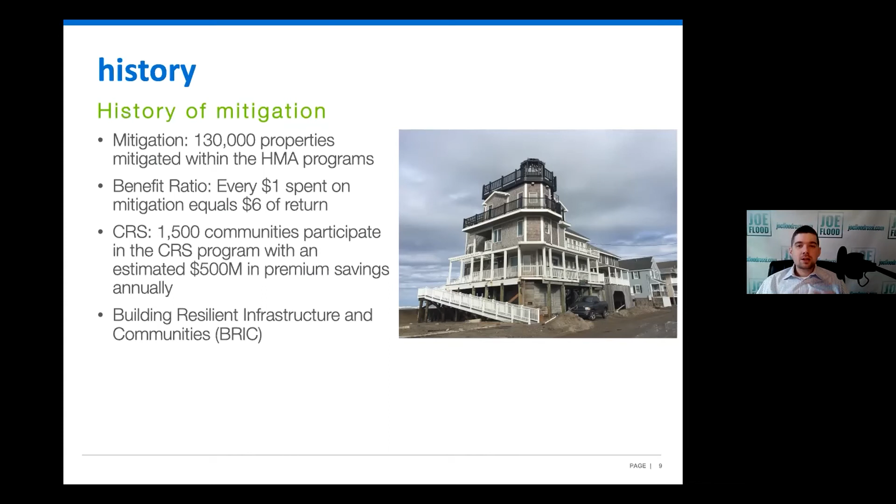And then a history of losses. Massachusetts has, and that number is actually lower now—I think the number is closer to 60,000 NFIP policies in force, and of course an unknown number of private flood policies. I can tell you that within our agency, that number alone is somewhere around probably 500. So we know the number is still around 61 to 62,000 flood policies here in the state of Massachusetts.

So again, we have a major underinsurance issue here in the state of Massachusetts, and that number is reflected nationally. I think the number is 12% of households in Massachusetts, and in the country, have flood insurance, compared to the estimated 60 million that are vulnerable to flood. So the numbers are just so crazy, and it's only going to get worse unless we do something about it.

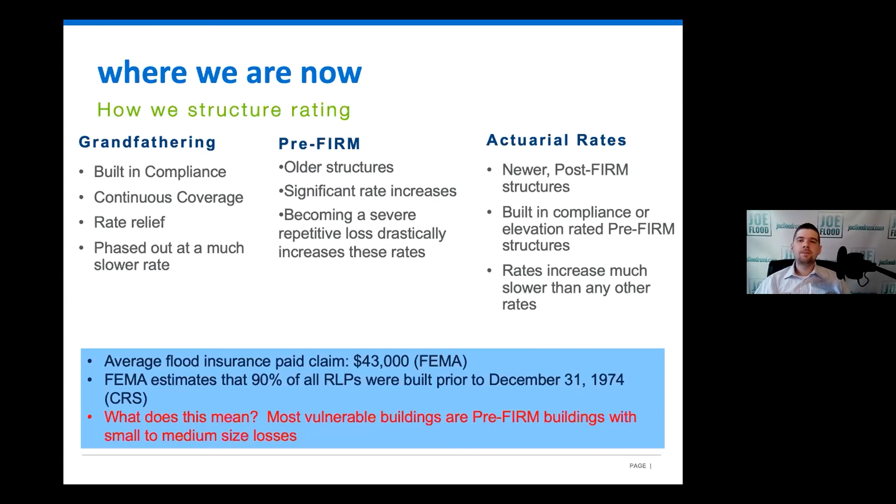But I think what's really imperative is taking those first 2 rating categories and looking at the blue box below. The average flood insurance claim since the program started is about $43,000. And FEMA estimates that 90% of those repetitive loss properties were built before December 31st, 1974. So what this means is our most vulnerable buildings are older buildings with small to medium-sized losses. And I can tell you I have seen this time and time again, where our older structures are receiving the most and the worst claims. And you can see that's the rating categories that fall into that.

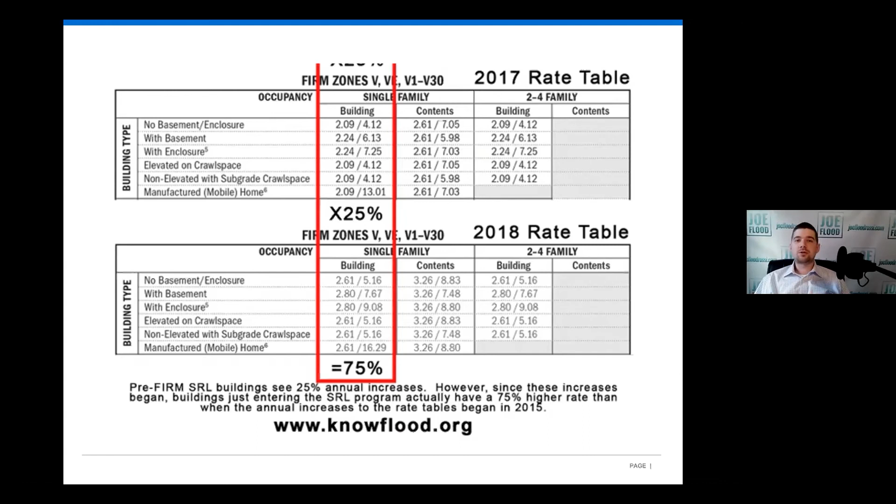I'm not expecting you to read these rate tables, but this shows that as of 2017, and now it's only higher, these older buildings are seeing huge rate increases. You can see 25% year after year. As of 2018, that increase was 75% if you added all the years up, and now it's 125%. This is the category of structures we're most concerned with, and it happens to be the category you'll see the most in our cities and towns in coastal Massachusetts.

So where are we now? Like I said, these older structures are seeing these huge 25% a year increases. And if you're not seeing a 25% annual increase, these older structures have a mandatory 5% increase. Look at where we're headed with rates - they're not going to be less. The costs are only increasing. There's legislative changes coming, too many to note here, but basically Congress is not going to go any easier on these older non-mitigated structures. The rates are only going to continue to increase.

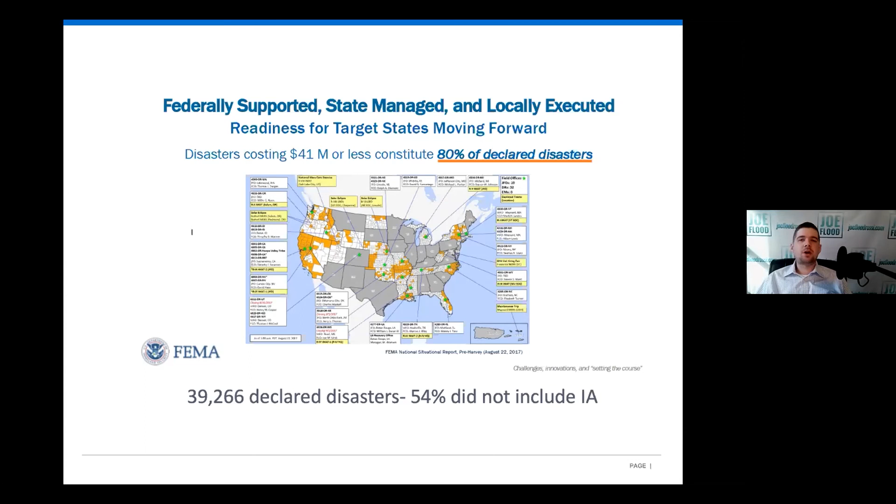Since 1953, out of over 39,000 declared disasters for flood, that's per county. So there haven't been that many, but if you add up all the county declared disasters, there's been 54% that didn't even include the individual assistance declarations, which are required for individuals to receive aid after a presidentially declared event. So flood insurance becomes your only option for recovery. This is a really stunning statistic that shows what's happening in our country - even when we see these presidentially declared disasters, more often than not, they're not being declared with individual assistance.

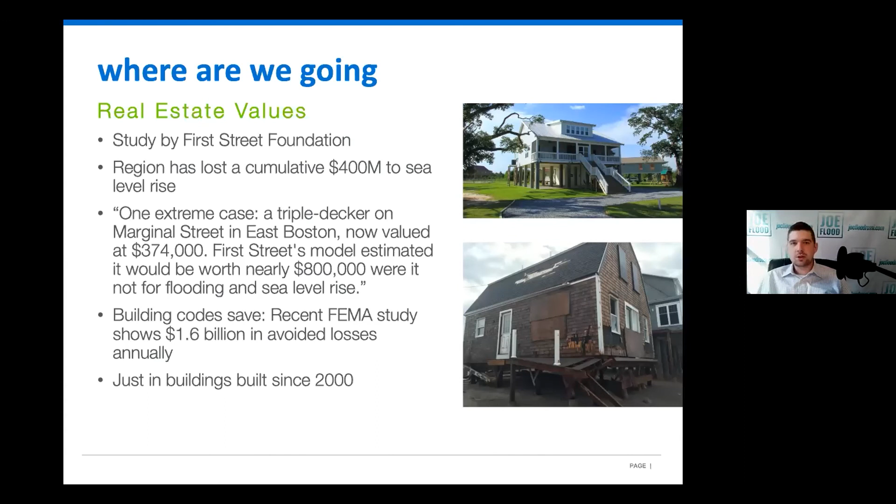So where are we headed? We know by studies done in the past that the region has already lost a $400 million accumulated value to sea level rise. So building codes save - it's been shown that just since the year 2000, every year we save almost $2 billion by implementing our building code. This is not just an insurance issue, it's a cost issue around enforcing our building codes as well.

And of course, building structures that meet that 100-year standard, which is the Levee Analysis and Mapping Procedure, which is what any type of Boston barrier would meet or exceed. This new program eliminated the with-or-without-levee distinction, meaning it either met the 100-year standard or it didn't. We now have varying standards in between, but the LAMP program doesn't instruct the construction of the levee, rather it just accredits it. So we would be building to this standard and then get it accredited.

Three-minute warning, Joe. Great, almost done.

Again, premium versus code. Large commercial buildings could see a drastic reduction in premiums because the code allows basements in high-risk flood zones for large commercial projects. I get a lot of questions - well, how is that building in the seaport getting a basement put in when you're not allowed to have a basement? Well, the code says you can. That causes the cost of these buildings to go way up because the NFIP, while you're allowed to do it, does not reflect it in the premium. And private flood insurance says we don't want anything with a basement in a high-risk flood zone. So the costs will only improve as well for our newly constructed areas, not just our historic structures.

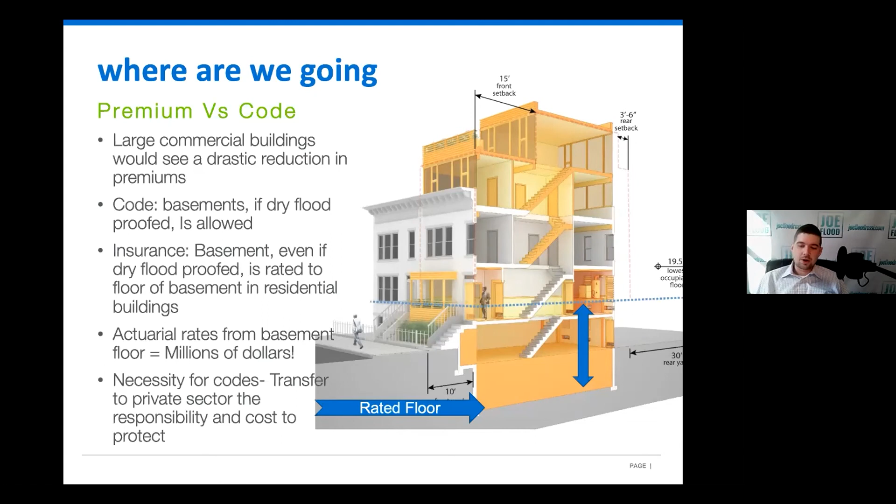So you can see that even though this building shown here has a basement, and it's mitigated and there's a lot of resilient issues going on, the fact that it still has a basement, that's the floor it's rated to.

Where are we going in the future? I mentioned that there are a lot of changes coming. Risk Rating 2.0 is something the NFIP is working to implement this year, in 2021. I don't think it'll happen for a lot of reasons we could go into, but the idea is to get rid of this binary system where you're in or you're out, stepped into those three primary zones.

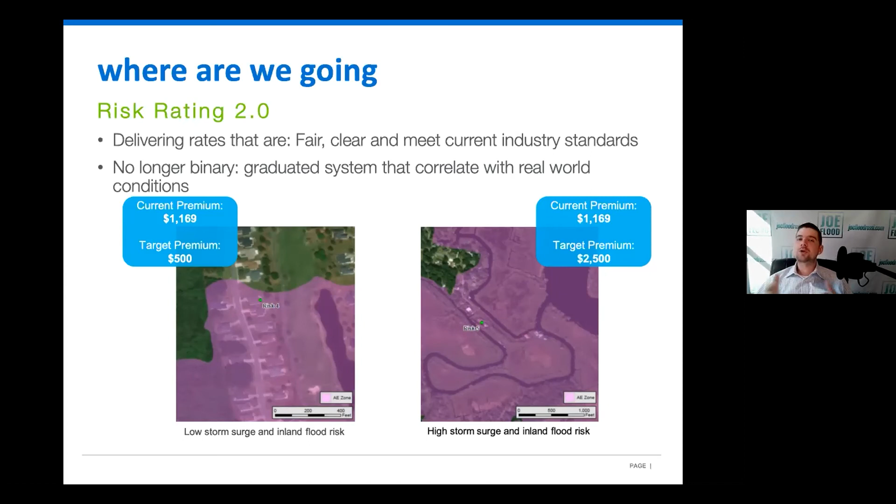Let's take a look at the source of flooding, and all the different characteristics that regular insurance programs rate structures by. You might ask, if you're getting rid of the in-or-out system, how would a barrier system help costs? Because it would actually say the distance of the building to the water source is much further away, so costs would continue to decrease. There are a lot of details not really figured out yet, but here are some of the pieces that would go into Risk Rating 2.0 that are much different than today's rating system.

So to conclude, here are some of the financial impacts: a reduction of flood elevations, large commercial buildings would see reductions in premiums, less flooding would restore some real estate values, reduction of repetitive claims, less impact around remapping - a remapping wouldn't impact the structures because the barrier would help prevent those maps from changing so often - restoration and prevention of coastal erosion, less damage to our coastal infrastructure, and less impact with implementation of future rating changes like Risk Rating 2.0.